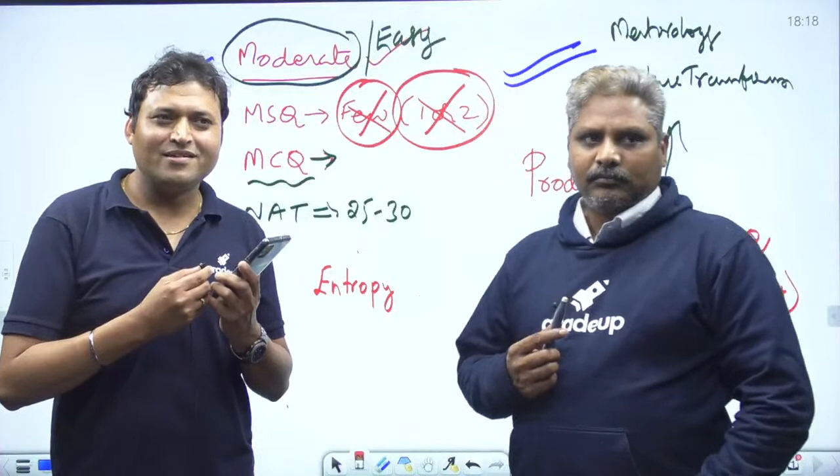Then there was a question based on instantaneous center. They wanted to know which are the instantaneous centers in the given diagram. There was one question based on this.

In rolling, in the metal forming section, there was a question based on width increased and thickness decreased. So they asked us to calculate the new length of the workpiece. So directly it's volume conservation again. In the morning session also there was a question from rolling.

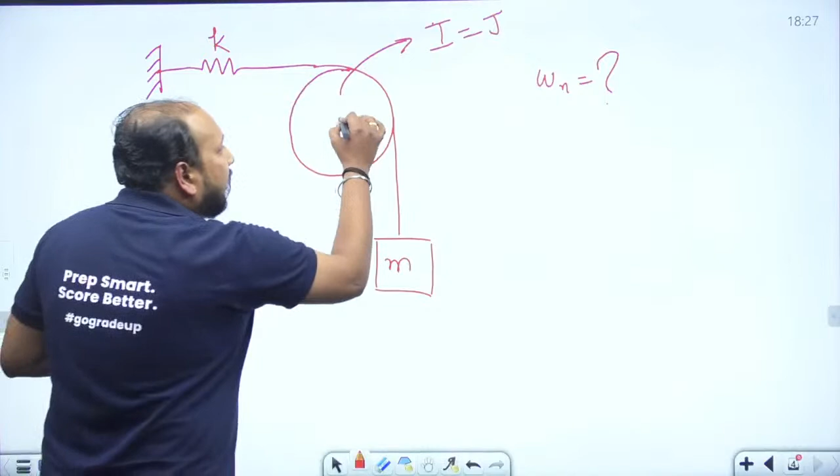In this problem, you have to calculate the natural frequency of vibration in radian per second. Very easy, you can directly apply. Let us suppose we're having a small deflection in theta, so we'll be having inertia force I theta double dot. In this case, mg will be having a restoring force as mg r theta, and in the spring also we'll be having k into r into theta. Is this clear? We are having mg and k r theta. What do we have to do? We have to use direct formulation.

How do we use it? Simple: I theta double dot plus mg r theta, because the deflection which we are getting over here, that is r theta, the same deflection will be in this mass also and in the spring also. So this will be plus k into r theta, this is equal to 0. You have to calculate the torque, and you'll get the direct formulation. So what will be the correct answer?

You'll be having I theta double dot plus mgr plus kr square into theta.

In vibration, we solve these types of questions very frequently. We try to add different springs, we try to remove this rolling part, we are directly connecting. So there are many combinations of questions you can expect from this vibration topic. I want everyone to like this problem, because this question is very, very important.

Okay, so now the question is very easy. You're having theta double dot plus mgr plus kr square into theta, divided by I, equal to 0. You can equate this equation with the formulation theta double dot plus omega n square theta equal to 0. From this, omega n is equal to under root of mgr plus kr square by j, because in the problem they are not giving moment of inertia directly as I, they are saying it in terms of j. So we'll be placing this value and we'll get the natural frequency of vibration for this kind of problem as mgr plus kr square by j.

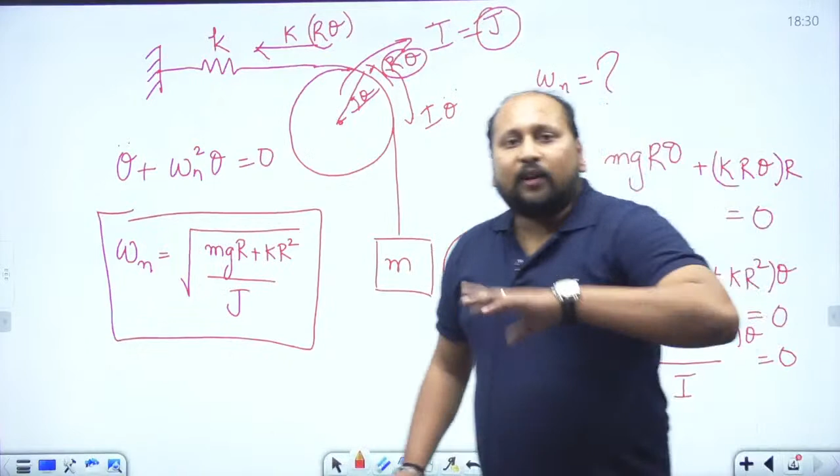Now normally in vibration we do derivation in this type of problem, so it's a purely conceptual problem from a vibration point of view, and definitely it's a 2 marks problem. Very easy, it was an MCQ problem with some options, so the correct answer is mgr plus kr square by j.

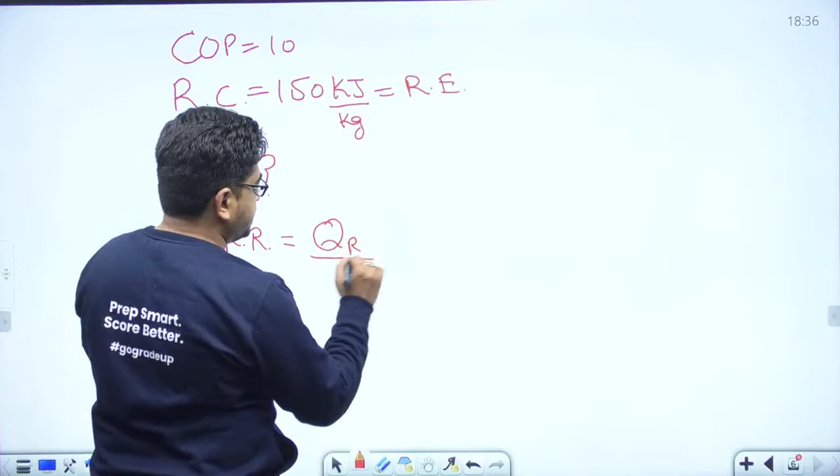Tell me the formula for heat rejection ratio. That formula for heat rejection ratio is heat rejection in the condenser divided by refrigeration effect, or you can also write it as 1 plus 1 upon coefficient of performance. So from here we can write heat rejection divided by refrigeration effect. What is refrigeration effect? Which is 150. So refrigeration effect is 150, 1 plus 1 upon coefficient of performance is 10.

So you have to find the value of heat rejection. How many of you have solved this correctly? Please write. Heat rejection is coming as 165 kilojoule per kg. So this was a very simple question, you can easily do this, right?

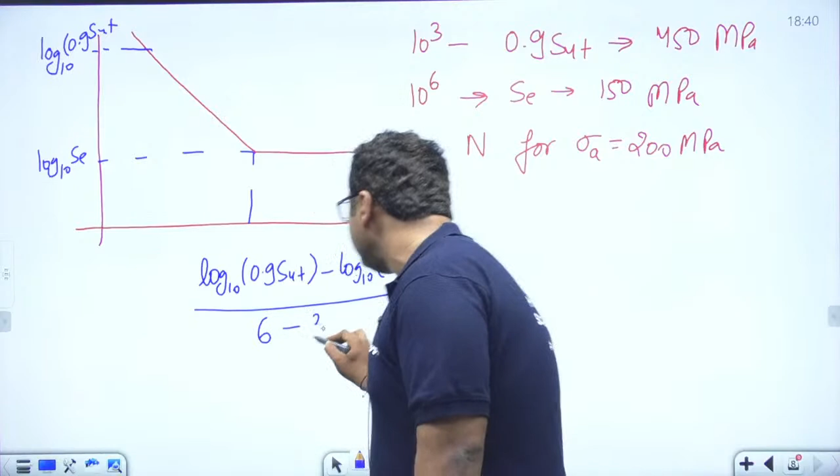So when we have done this type of question in class, I told you we will be having one point like this, log base 10, which is going to be 0.9 times SUT. You have one point here as log base 10 SE. And we will be using the straight line equation: log base 10 0.9 times SUT minus log base 10 SE, divided by 6 minus 3, equals log base 10 of 0.9 times SUT minus log base 10 of sigma amplitude given, divided by 6 minus x.

By doing that, you will get the value of x to be 3.786. Putting this value, you will get the number of revolutions, which is 10 power x, equal to 6111.72 revolutions. So guys, I feel you are getting it.

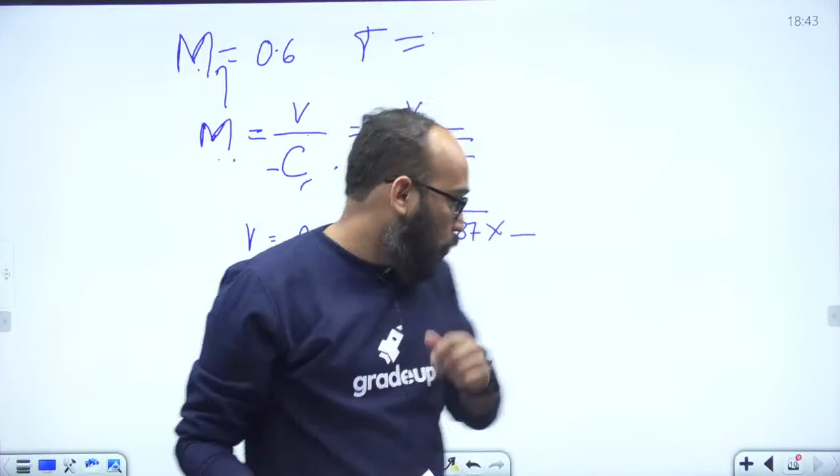Okay, cool guys, one more question. Again a very standard question coming from refrigeration and air conditioning, psychrometry, which is the regular question that comes up. So the values that were given.

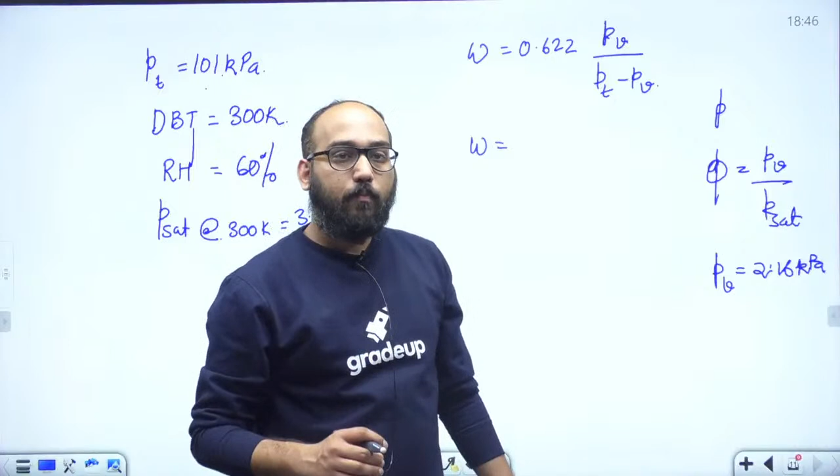Come on, what is the answer? So this is coming as 0.01359 kg per kg of dry air. Okay, please make sure what was the unit. Are you getting it guys?

Okay, so this is again, we'll say that it is memory based. As you're letting us know with the data, we are getting with the solution. Come on guys, please do share. Yes.

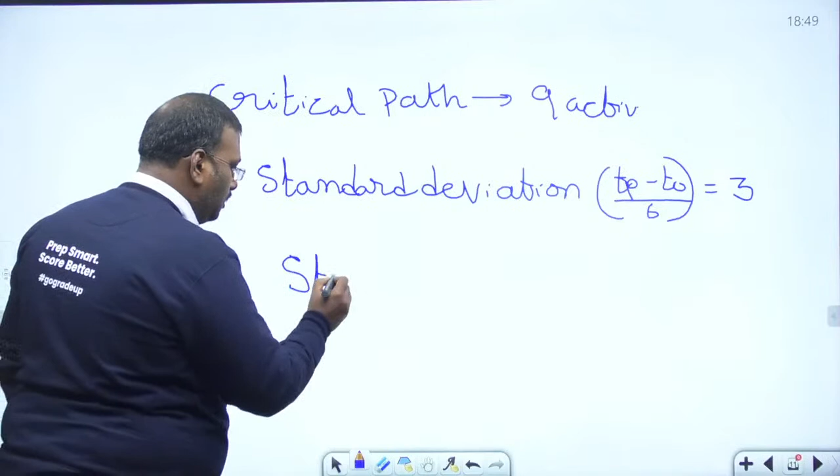So it was given as 3, but they are asking what is the standard deviation of the project? Standard deviation of the project. So we have to find out standard deviation of project. How we have to get this one, sir? Very simple.

That is nothing but sigma is equal to square root of sum of the variances, TP minus TO divided by 6, whole square, my dear friends.

So now how can we get this? They gave that TP minus TO divided by 6 was given as 3. Therefore, TP minus TO by 6 whole square is equal to 9.

Therefore, variance of project, sigma is equal to square root of sigma. Number of activities given is 9, i is equal to 1 to 9, and here it is going to be 9. Therefore it is going to be square root of 81, which is nothing but 9 days, my dear friends.

So the standard deviation of the project is 9 days. Is it clear to all of you?

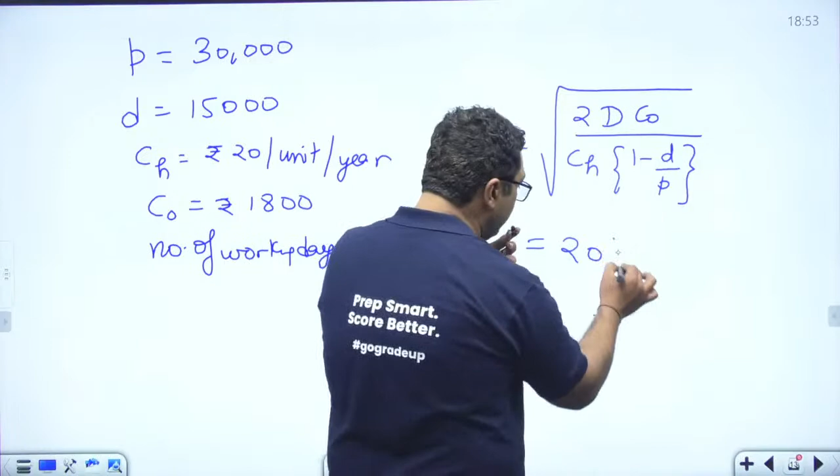It is going to be 2DC0 upon CH, 1 minus D by P. That is what you have to do. You need to apply this formula, and after getting this, you will be getting the answer to be 20,124, yes, 0.6. So these are the answers, this is the answer for this question.

Okay, so yes, now Akash sir is coming for a question. Hello sir, hello guys, how are you? So I hope your gate exam has gone well.

So now I will have one small question for you, that is from production. It's a very simple question and you might have done this kind of question a lot of times. They are asking you basically about which cast iron possesses all carbon in the combined form. Any idea guys? Any guesses? What is the answer for this? The question is this basically.

Cast iron which possesses all carbon in combined form - you can give the answer to this question without even looking at the options. Okay, what will be the answer guys?

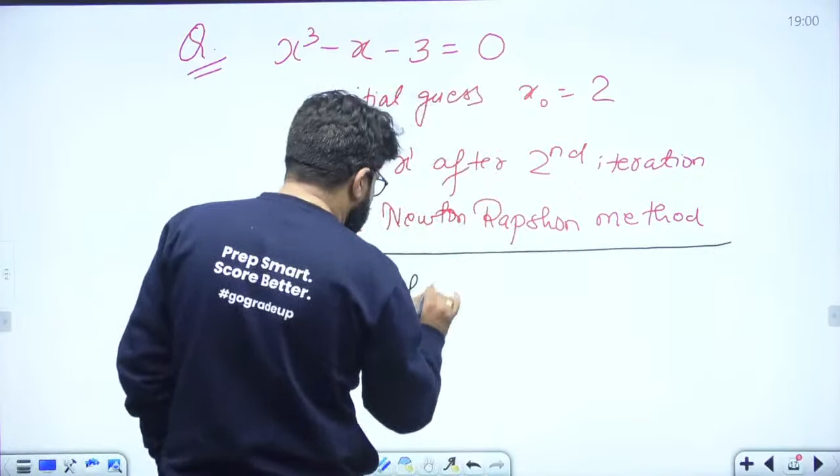There is one question from polar coordinate double integral, that also we are discussing. So what is the answer for this by the Newton-Raphson method? For Newton-Raphson method we need the f(x) and f'(x). f(x) is equal to x cube minus x minus 3, so f'(x) is equal to 3x square minus 1.

Dilip, as of now, the morning mathematics questions I received, around 4-5, were moderate. Evening questions are also moderate, like one differential equation question that is even simpler than the morning one. Mathematics ki baat kare, Newton-Raphson is only calculative. Only thing that you were commenting about, that polar integral question, that is also very simple. Students just worry looking at the polar integral, but there's nothing like rocket science in it. So more or less similar level as the questions we have collected now, but we'll be collecting a few more questions and then we can comment.

Shubhadeep, correct. Kailash, correct answer. Very good. Kailash, you gave the first iteration result first. Alok Mishra, Ritesh - so everyone has done this question, 1.67 approximately. So you know what has to be done. This is f(x) and f'(x), and by the Newton-Raphson iterative formula, I am going to write xn+1 is equal to xn minus f(xn) divided by f'(xn).

Kailash, you already brought the answer for the double integral too. That's correct, I'm going to take that question. So basically guys, suppose you are finding x1, so that will be x naught minus f(x naught) divided by f'(x naught), and then you complete the calculations for x2, which is x1 minus f(x1) divided by f'(x1). Because we require a basic calculator for this calculation, complete the calculation - approximately 1.67.

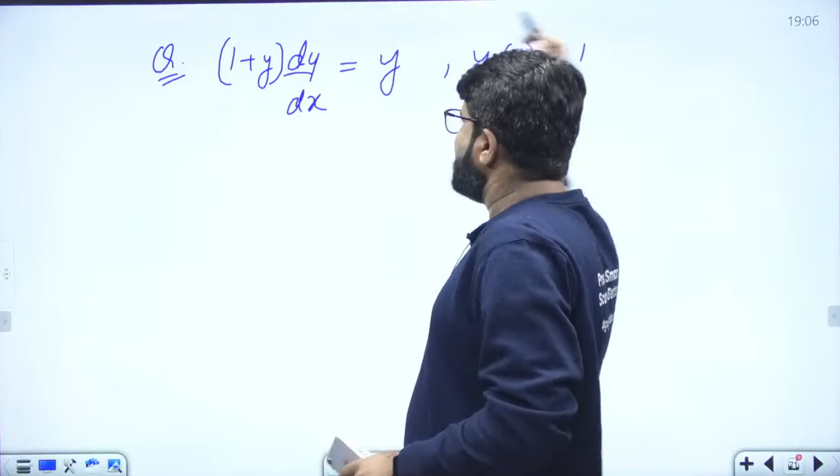This is a differential equation question: 1 plus y dy by dx, easier than the first lot. This differential equation question is easier than the first, given y(1) equal to 1. I just need to solve and write down the expression for y. That is the question I have got.

1 plus y dy by dx equal to y. In the morning the question was based on the linear differential equation of first order. This one is totally variable separable, so let us divide by y. So (1 by y plus 1) dy equal to dx.

That's it. What do we do next? Integrate it. Okay, what is 1 upon y integral? ln y. Integral of 1 dy is y. So ln y plus y is equal to x plus c. Given that y(1) equal to 1: log 1 is 0, plus 1 is equal to x.

X is also given as 1, so 1 plus c. So 1 equal to 1 plus c. C is cancelled out and c is equal to 0.

Using the initial value, solution is also obtained: log y plus y is equal to x. Now the rest depends on how the options were arranged. We have not got the options, but we have got the question. So if the options are rearranged, you will be able to do it smartly. The answer is log y plus y equal to x, that is the solution to this given differential equation.

To this differential equation, maybe the options are given in the form of exponential as you're suggesting. Yes, that is also quite possible, so we can arrange it in that form also. Not a big deal, okay, so I think...

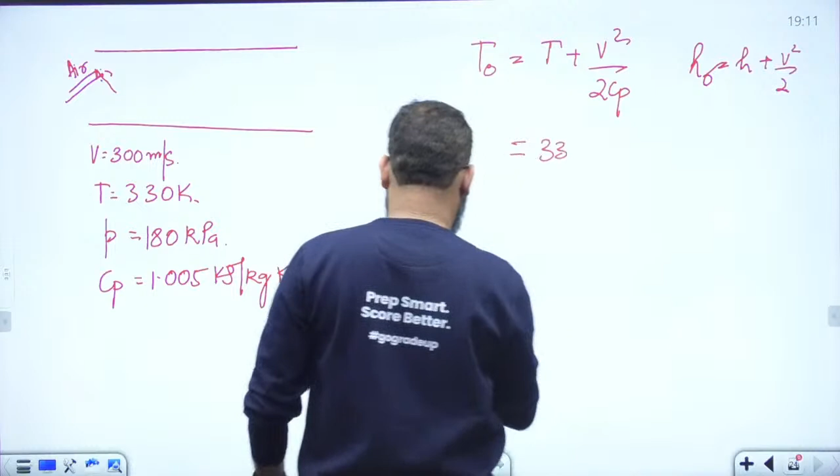Stagnation temperature T0 is given as T plus V square by 2Cp. It actually comes from applying the steady flow energy equation, where we get this as V square by 2. Cool enough? Now if you put the value, this is 330 plus, with 300 square divided by 2.

Now here comes the point guys - these enthalpies we normally put in kilojoule terms. If you are putting it this way, this should be 2000. Or what you could have done was convert Cp back to joules, whichever way you want to do it. So normally we discuss this.

So 2000 into 1.005, you put the value, this is coming as, come on, 374.78 Kelvin. Was this the answer guys? Was this the answer?

So we have got 2 questions from compressible flow. Now we have Rishi sir with another question.

Never mind dear, never mind. Hello my dear friends, come on, cheer up yaar. Share this information with all your friends so that they will be benefited and can analyze how they have performed in this examination, my dear friends. Come on, cheer up. I am here with one more question from Deflection, my dear friends.

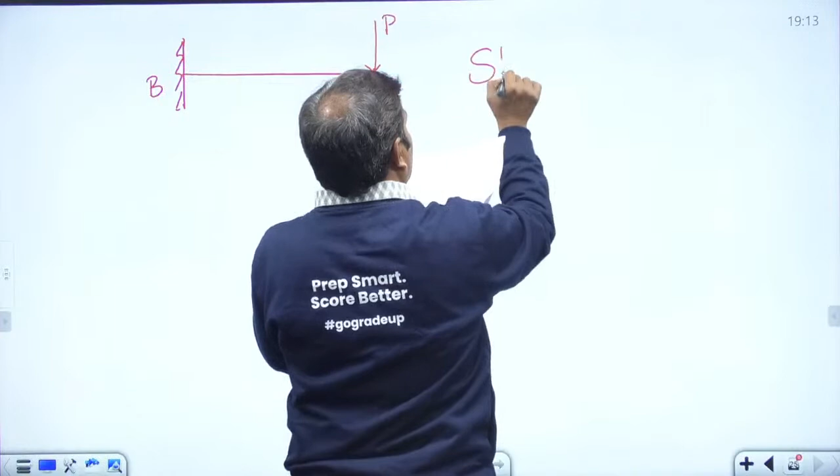So once again, my dear friends, the question is from Deflection, and the slope is being asked, my dear friend. The slope is being asked for a cantilever beam subjected to the end load P, and this point is named as A and this is B, my dear friends. The question is, what is the deflection slope at point A? Can anybody tell what is the answer, my dear friends?

Can anybody tell what is the answer to this question? Kailash, thank you. What is the answer, my dear friends? Come on yaar.

So Piyush, don't worry, GATE is one of the exams, my dear friend. There are so many series of examinations after GATE - it may be ISRO or BARC or steel plants, so many exams are there. Don't worry Piyush, GATE is one of the exams, so you get one more chance of better settlement in life, my dear friend. Don't worry, don't get demotivated. Yes, very good, my dear friends.

Rahman, Harshit, very good, my dear friends. It is 50 microradians - the right answer, my dear friend. Very simple question, you can solve it using the bending moment approach.

Area of the bending moment diagram. If you see the bending moment diagram, it is clearly mentioned in the question that the area of the bending moment diagram is given as 10,000 Newton meter square. And EI value, that is flexural rigidity, is given as 200 into 10 to the power of 6.

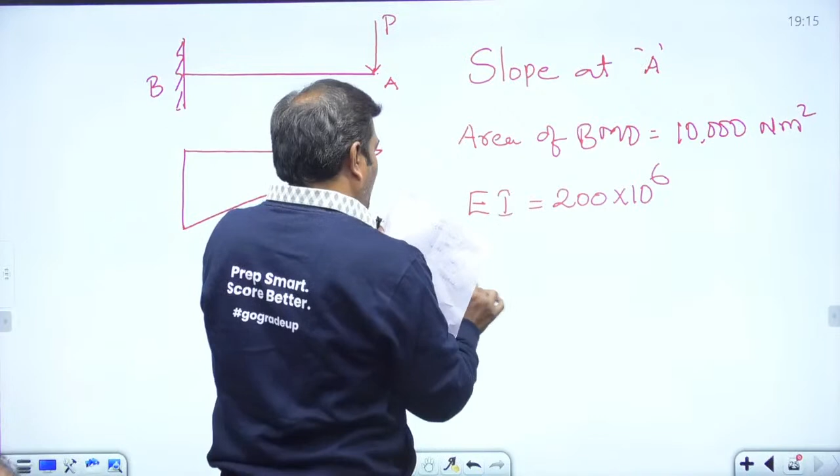We know by the formula that theta A minus the slope at B, the fixed end, where theta B is equal to 0, is equal to the area of the bending moment diagram divided by EI, that is 10,000 divided by 200 into 10 to the power of 6. The answer comes out to be 5 into 10 to the power of minus 5 radians, which is 50 micro radians, as asked in the question.

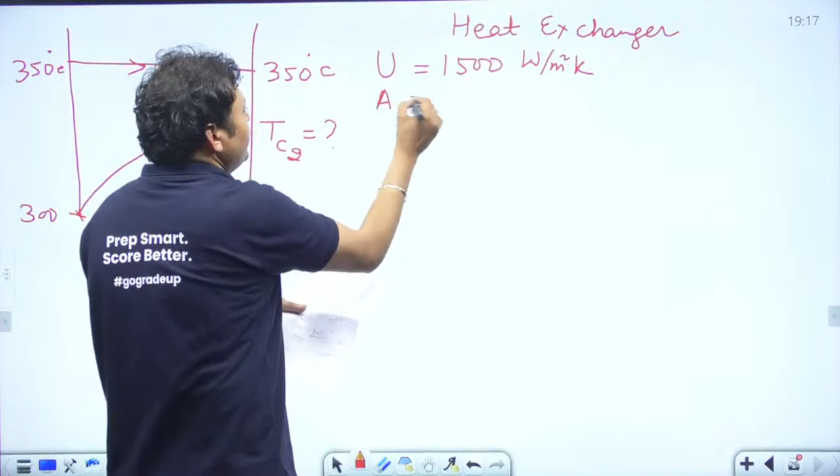So how to solve it? The other information given was the overall heat transfer coefficient as 1500 watt per meter square Kelvin, and area of heat exchanger as 400 meter square. The unit is meter square. The mass flow rate of the cold fluid was given as 100 kg per second, and specific heat is given as 4000 joule per kg Kelvin. So how to solve it?

By the energy conservation equation, Q can be written as the heat transfer rate, which is the heat gained by the cold fluid, that is mass flow rate of cold fluid into specific heat of cold fluid, into temperature difference for the cold fluid, so it is TC2 minus 300 degrees Celsius.

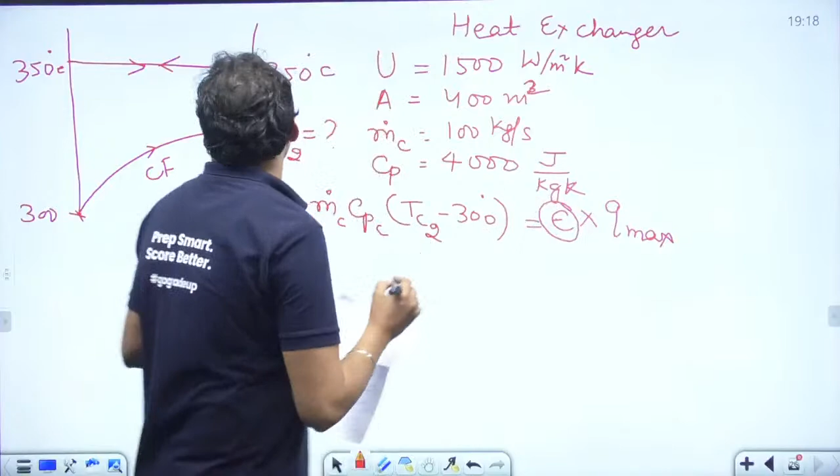That will be equal to effectiveness of the heat exchanger into Q maximum. How to find the effectiveness? Because there is a phase change, effectiveness is given by 1 minus e to the power minus n, where n is the NTU. How to find the NTU? NTU is equal to UA upon C minimum. What is C here in the denominator? C is always the heat capacity, the product of mass flow rate and specific heat, so UA by mass flow rate of cold fluid into specific heat of cold fluid.

What is the NTU? If you put in the values, everything is given, so UA by C minimum for the cold fluid. If you put the values, NTU comes out to be 1.5. And if you put the value of NTU into the effectiveness formula, effectiveness comes out to be 1 minus e to the power minus 1.5. What is the effectiveness of the heat exchanger? I have solved it for you, it will be around 0.7768.

Effectiveness will come out to be 0.7768. Now what is Q maximum? You don't have to solve everything. First develop the expression, and if the terms are getting cancelled out, then you can do that. M dot C into CC into TC2 minus 300 into...

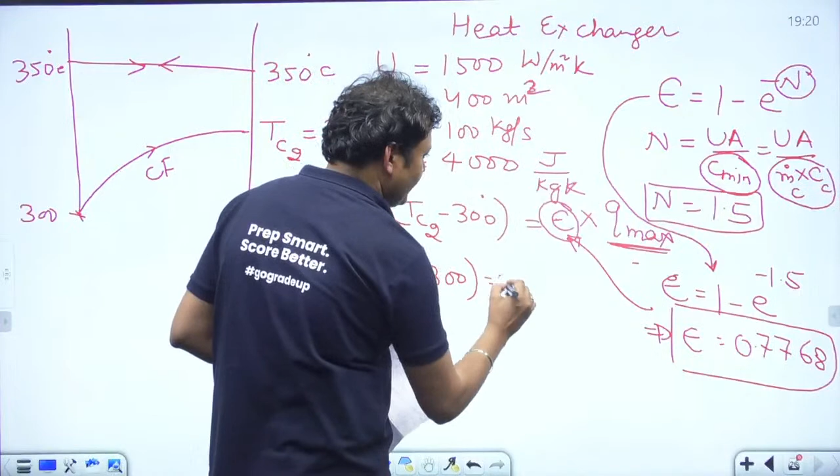Effectiveness is 0.7768 multiplied by Q maximum. If I remove this effectiveness, we have already used the effectiveness value, so Q maximum will be equal to C minimum. Effectiveness is also equal to Q upon Q maximum. So Q maximum into effectiveness, and Q maximum will be equal to C minimum, that is M dot C into CC into TH1 minus TC1.

This is TH1 and this is TC1. If you subtract these two, then it will be 50. So the mass flow rate is getting cancelled out, and specific heat is getting cancelled out with this specific heat. So what is the value of TC2? Can you let me know? 300 plus 0.7768 into 50.

What is the answer? Please share your answer. So that was the question. The question was a little lengthy, but yes, it was not that difficult. The final answer will be around 338.84 degrees Celsius. That should be the answer.

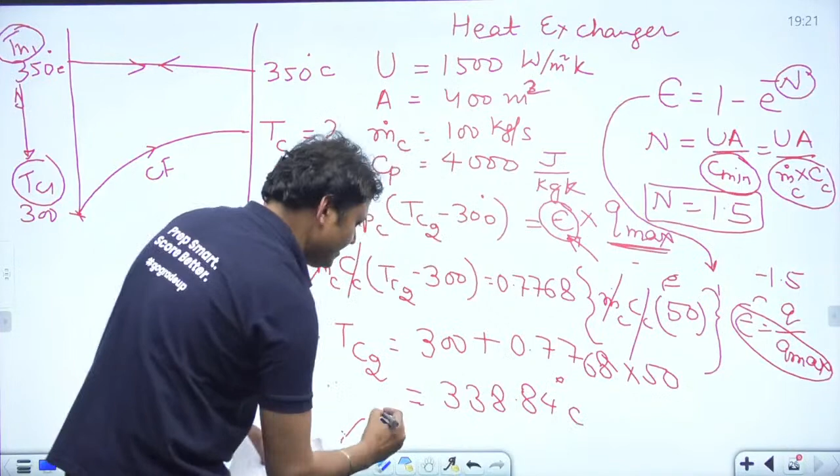Are you guys getting the answer? So how many of you have done it correctly? Please keep on sharing your information, keep on telling us whether you have got the correct answer or not.

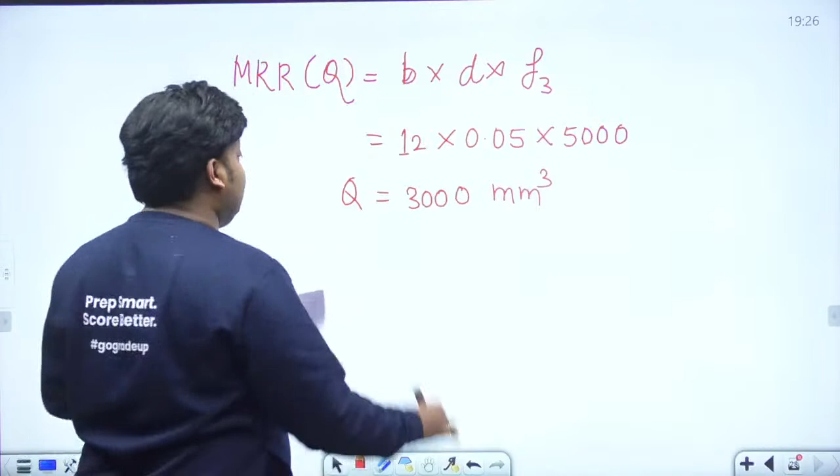This will be the MRR you are getting in a single pass, but they are saying the number of passes is 20. So I can write the total MRR will be 20 multiplied by 3000, which will be around 60,000 mm cube per minute, right?

So definitely to calculate the MRR, it is given as the width of the grinding wheel multiplied by depth of cut multiplied by table speed. This is the MRR.

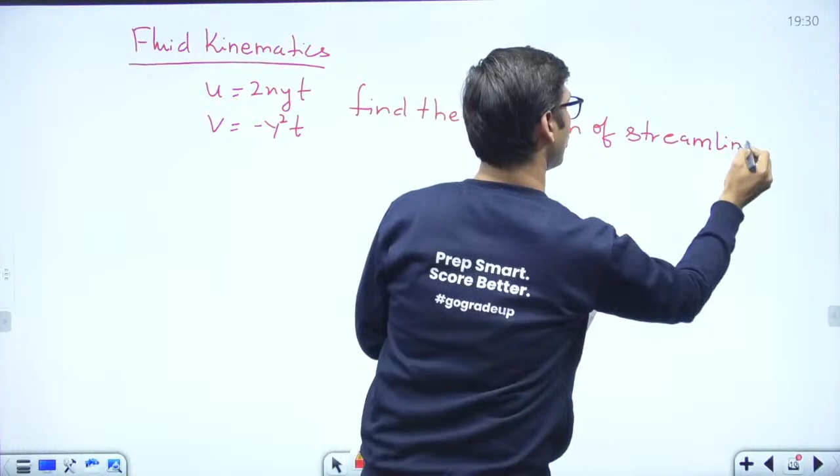This question came from fluid kinematics. In that question, it was given that the x velocity, u, was 2xyt, and the v component of velocity was minus y square into t. You have to find the equation of the streamline at point 1, 1.

This was a question from fluid mechanics, fluid kinematics topic. As you have to find the equation of the streamline for two-dimensional flow, since they have given the x and y components of velocity, you know the equation of streamline in 2D is dx over u equal to dy over v.

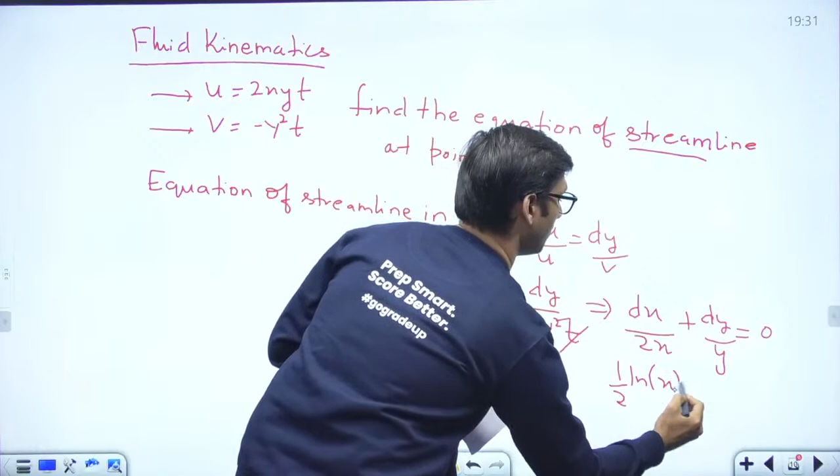If you put the values, you get dx over 2xyt equal to dy over minus y square into t. The t and y cancel out, leaving dx over 2x equal to plus dy over y, equal to 0. Integrating this, you get half of log x plus log y equal to constant, which can be written as log of x into y square equal to c. Since they have given the point x, y as 1, 1, substituting gives c equal to 1, so the equation becomes xy square equal to 1.

I hope this was the answer for this question. Yes, my dear students, have you got this answer? xy square is equal to 1 — this will be the solution for this question.

Let's see another question, also from fluid mechanics. For two-dimensional incompressible flow, the equation was given that you have to find the value of del by del x of u square plus del by del y of uv.

The options given were: option A, u du by dx plus v du by dy; option B, u dv by dx plus v dv by dy; option C, u du by dy plus v dv by dx; and option D, u du by dy plus v dv by dy.

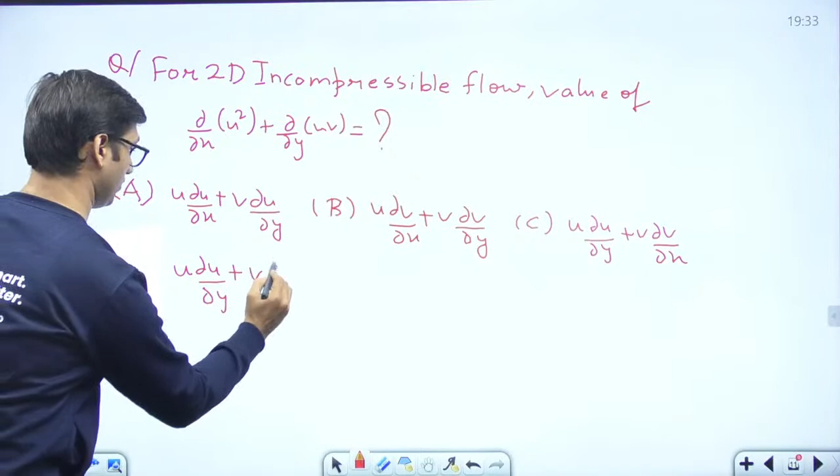So how can you solve this question? One important thing mentioned is that it is an incompressible flow. That is an important catch here. All right, let's see how to solve this question.

Now the equation given was del by del x of u square plus del by del y of uv equal to 0. To solve this, you have to use some mathematics or differential form. If you open this, you will get 2u du by dx plus u times dv by dy plus v times du by dy.

You can also write this equation as u du by dx plus u du by dx plus u dv by dy plus v du by dy. If you take u common here, you get u times (du by dx plus dv by dy) plus v times du by dy.

Now, for incompressible flow, the continuity equation has to be satisfied. The continuity equation is du by dx plus del v by del y should be equal to 0.

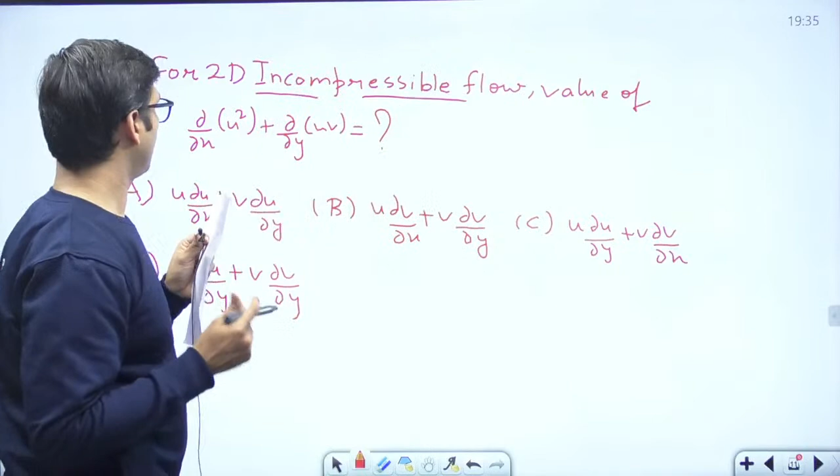From here, where do we get the PDF of the solution, sir? Yes. This question is wrong, sir. Actually we have got this question based on memory, and this option has been shared. Which question are you saying is wrong? They gave it to you in the options. Okay, so maybe the question we have got, as I told you, is memory based, and some student shared this question. So definitely if the question is something else, we will get some other answer. As I told you, these are all memory based questions.

So the last question I would like to share is from compressible flow. In this, they gave that there was a duct, and in that duct some air was flowing. The velocity given was 300 meters per second, and temperature was 330 Kelvin. Please tell me if it is correct or not.

Okay, has this question been done already? Please tell me, has the solution already been given? Yes, this question was from compressible flow. You have to find the stagnation temperature, which can be calculated using the formula: stagnation temperature equals static temperature plus V square by 2Cp. Have you already got the solution for this question?

So I will give the solution for this question. The velocity was 330 meters per second — sorry, one second, velocity was 300. Okay, already got it, alright. So if you already got the solution, then it's fine.

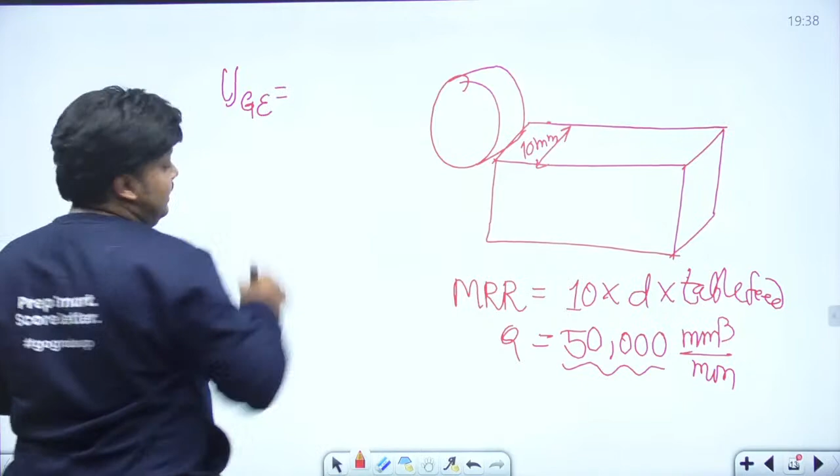And finally, if you put here this 50,000 instead of the 60,000, because we have taken the 12 mm - of course 10 mm is there. So whatever the MRR we are having available on the plate only, right? So definitely this grinding, specific grinding energy will be getting this divided by this 50,000, and that will be 192, right?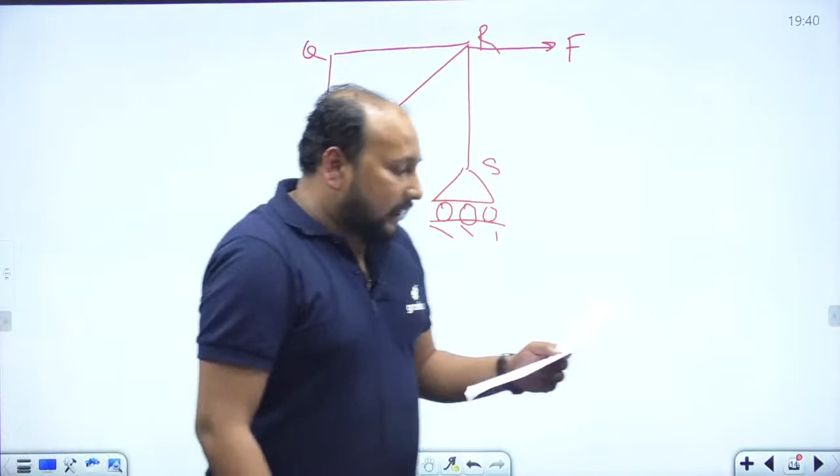From your engineering mechanics. The question was something like this: we are having a truss, we are having a hinge joint, and we are having a roller joint. This is point P, this is Q, this is R, and this is S. At point R we are having F. They are asking what is the force in the member RS. I hope everyone has solved this.

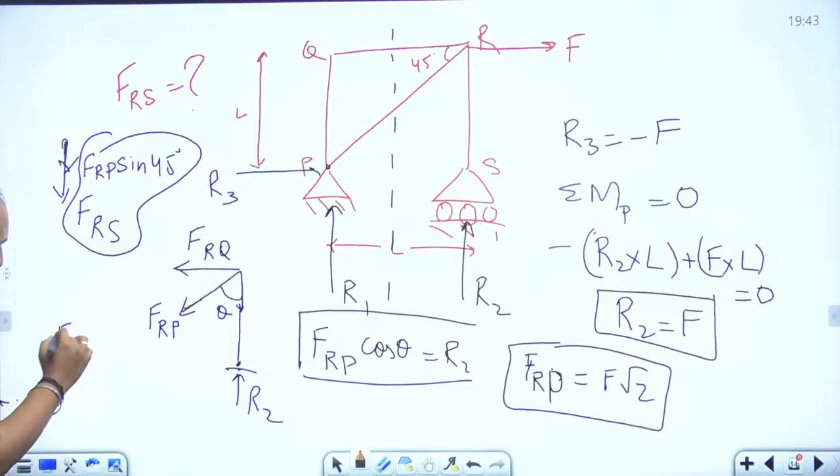What is the value of FRS? You will be getting directly F - take just joint R, so we'll be having a force RS and a force one more in the downward direction, that is FRP sine 45, and that is equal to 0. Just add these two values, you'll be getting ultimately FRS is equal to minus F. So your answer will be minus F.

Exactly, you can go with the beauty of mechanics - you can solve a single question by two methods, you can go with method of section, you can go with method of joint. Now there is one more problem from the theory of machines, and that is a very interesting problem - that is flywheel. The very interesting problem, that is flywheel.

In the question they are given the torque value is equal to 12,000 plus 2500 sine theta, sine 2 theta. Okay, this question was given. Along with this we are having RPM equal to 200 RPM and coefficient of fluctuation of speed equal to 0.5%.

I hope this question has been solved. The problem is they are asking the value of moment of inertia. It's a 2 marks problem, and its calculation is somewhat lengthy, but if you know the concept you can quickly solve it in a fraction of seconds.

Now what you have to calculate is the work done. Work is equal to T d theta. Now tell me what will be the cycle time. If you see this equation, respond in the comments what the cycle time will be. If you are having sine 2 theta, then definitely your cycle time will be equal to pi, because it's 2 theta.

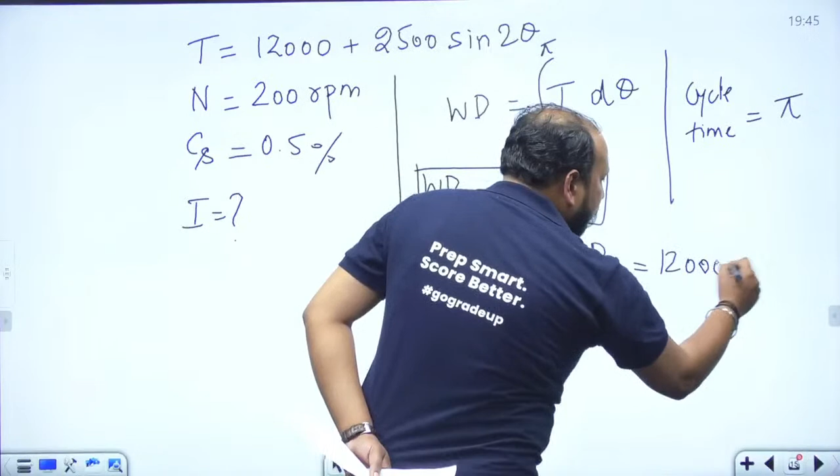Now what is work done? That is equal to T mean into cycle time. So your T mean is equal to work done by cycle time, and ultimately you'll be getting 12,000 Newton meter as your T mean. Now the question is you have to calculate the points where T mean and T are equal. So next step you go with T mean equal to T.

When you make it equal, ultimately 12,000 gets cancelled out. Let me write it for you: 12,000 is equal to 12,000 plus 2500 sine 2 theta. So ultimately you are getting sine 2 theta is equal to 0. So theta comes out to be 0 and pi by 2.

So next step is you need to calculate the maximum fluctuation, that is integral from 0 to pi by 2 of T minus T mean into d theta. Is it given plus minus? If it's given plus minus, then it will be equal to 1%. Accordingly you can get the answer.

So when you calculate this, delta E is equal to integral from 0 to pi by 2 of T minus T mean into d theta. So this will be 2500 sine 2 theta, integrated from 0 to pi by 2 d theta. Ultimately you will be getting this value to be 2500.

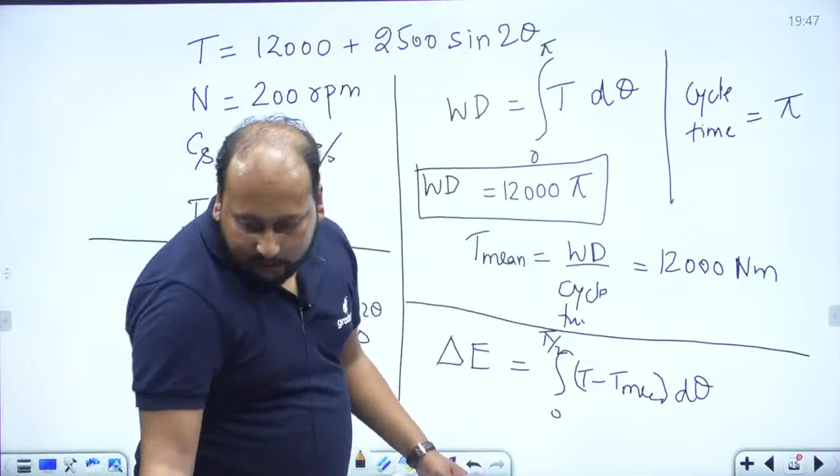You need to solve it and you'll get the exact value. Actually, the data I got is for 0.5%, so I was getting approximately, let me check the value... yeah, I was getting 1140. So definitely it will be half of that.

So your final answer will be 1140 by 2, that is 570 kg meter square. Exactly, very good. So approximately you'll be getting 570 kg meter square. That is the correct answer for this.

And every year, if you see from Theory of Machines, you are expecting one question from Flywheel, and this is it. Definitely if you compare the morning session and evening session for Theory of Machines, I can say that in the evening section the Theory of Machines was somewhat difficult compared to the morning session. So let's hope we'll soon be coming with new questions.

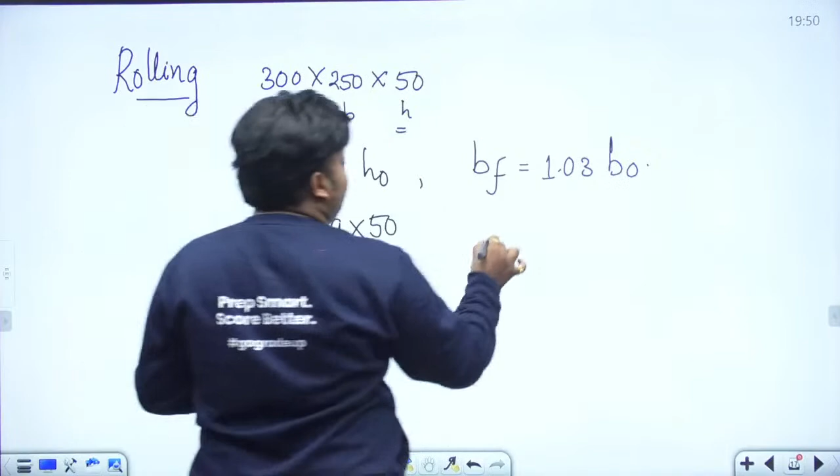And the final width, we are assuming it's a plane strain condition operation, so width is not supposed to change, but here spreading is given, 3% spreading for the width, so it is 1.03 times original width, that is 250. So after spreading it will be 257.5 mm.

And original length is how much? 300, I will write here, it is 300 mm. So tell me what is the final length. So of course, dear students, in any metal forming process the very first basic assumption that is valid is the volume constancy, right?

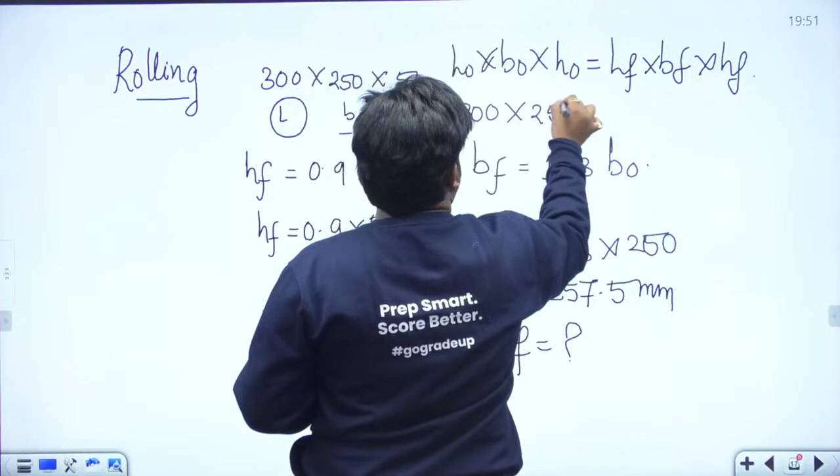So if I write, L original into B original into H original should be equal to L final into B final into H final. So tell me what is the answer. It is 300 multiplied by 250 multiplied by 50 is equal to H final 45 multiplied by 257.5 multiplied by this final length. Tell me the value.

So what is LF? I hope you are getting it is 3000, no? So it is 3000, dear students, it is 3000, right? So L final, tell me what is the answer you have got? Okay, 3000, right Utkarsh? Yes, 3000 millimeter is there. So yes, volume constancy is valid. Okay, length is 300, no issue, that is correct, absolutely correct.

So if you calculate, it will be 3236.24 mm. So simple volume constancy, nothing else.

Interpolator, dear Utkarsh, the function of the interpolator in the CNC is just controlling the movement of the machine axis. Okay, so it controls the feed rate of the axis, right? Very nice, very nice, that is absolutely correct. Very nice, very nice. So Rakesh sir is with me. Rakesh sir, oh dear, thank you sir.

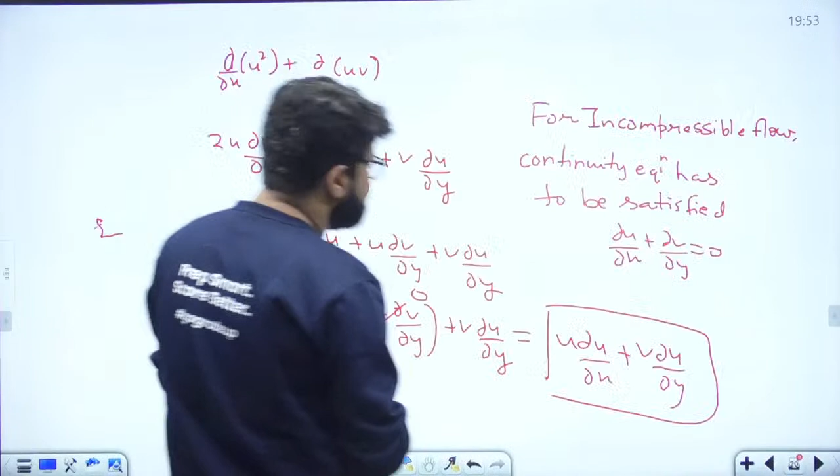Hello guys, so a few aptitude questions. I already discussed 4 maths questions. I have 4 more maths questions, but before that let's start discussing aptitude as well, because aptitude has not been discussed as of now. Okay, just one second guys. Yes, so some aptitude questions we need to discuss.

Okay, come on. So one of the aptitude questions coming up is from the very simple direction sense. It's not a complicated direction sense question, it is a very simple direction sense question.

Yes, aptitude again very easy as in all the papers. So one of the aptitude questions: X moves. GATE has asked good questions from direction sense earlier, but this is a very simple question of direction sense. X moves 50 meters towards west, and then it turns 50 meters right.

Then he turns 50 meters right. What is his position with respect to the initial point? Yes guys, quickly comment the answer. Only they're asking the direction, and yes Utkarsh, it is easy only.

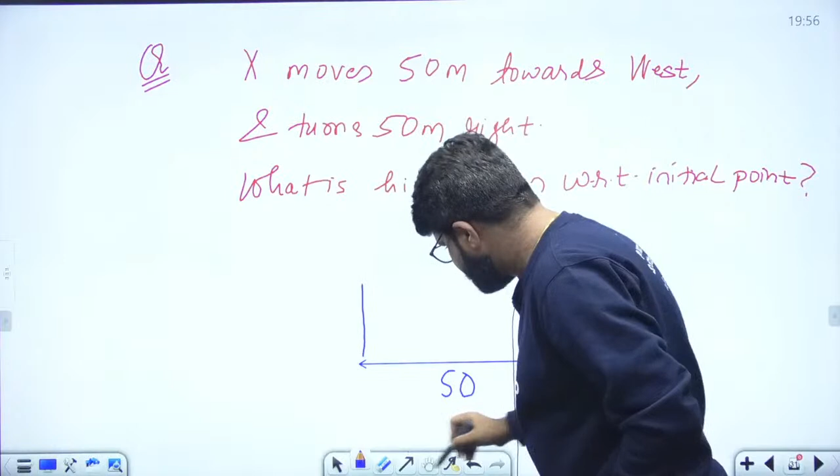This is 50, and then after moving west, I am turning right. So this is a combined direction - one is west and one is right combination. So I will be moving towards right, I take a right here. So west to right, this makes the direction. What is the final answer? The final direction you are able to see here is from the initial towards the final point - this is the west. Right means I have moved north.

It is actually northwest. Suppose they have asked for the distance - right be 50 meter gaya, so it is 50 root 2. Under root of 50 square plus 50 square, it will be 50 root 2 if they ask the distance. Yes Utkarsh, equilateral triangle answer was 1/4, very good, very good. I'll come to that question.

All right, so this is northwest. Simple answer - what is his position with respect to the initial point? This was the initial point, so initial point, this is north, and this is north, and this is west. So 45-degree northwest. Next one, what is the next question I have?

Okay, all right, so clocks question. This is basically not a clocks question, it's a logical aptitude question based on LCM - they have only used the word clocks. Otherwise if it comes from clocks concept, it's a slightly better question. So there are two clocks that start exactly - only the word clock is used, but this is not on the clock concept.

Exactly at 10 a.m., one rings for every 30 seconds, and the other one rings every 32 seconds. What is the closest time they both ring simultaneously?

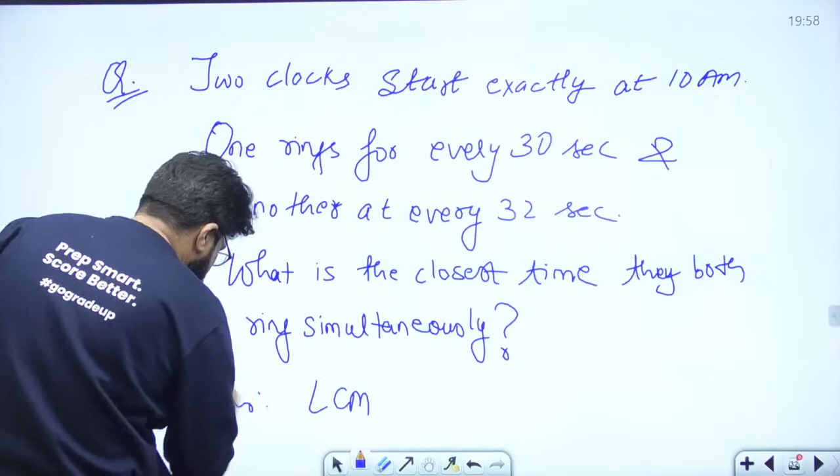So when they are going to collide, it's basically LCM of 30, 32. The LCM of 30 and 32 - you know how to find LCM - it's going to be 480. So the answer is going to be 480 seconds. Now they are asking the time, so 480 divided by 60, if you do this, it's 8 minutes.

If you divide by 60, it's 8 minutes. So what is the answer? 10 hours 8 minutes - 10:08 a.m. That is the answer for this.

All right, third one quickly, as expected - seating arrangement question. Here it is. As expected, seating arrangements being important in the GATE examination. P, Q, R, S, T are to sit facing the same direction. Now there are some conditions always given in the seating arrangement.

P and T - since this is linear seating, not circular - can't sit at the ends. Q is always second from left. The third condition is P can't sit next to S. Find the total possible arrangements.

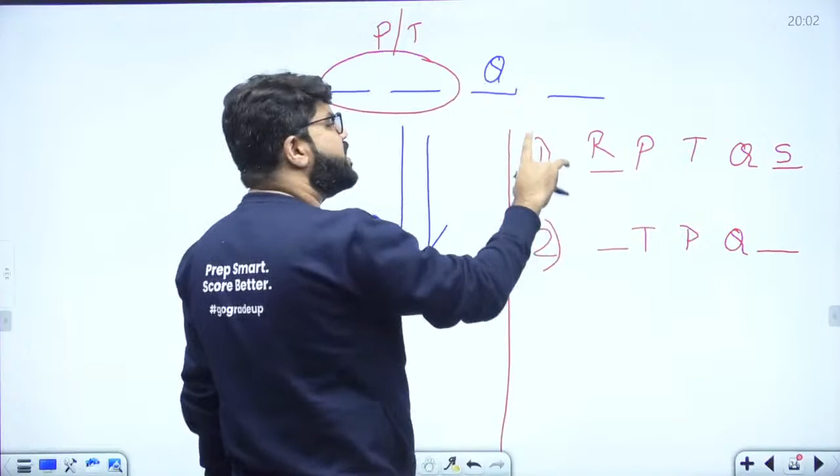Now once again I have reversed the T-P position, so TP is coming up here. Now P can't sit next to S, so S can come here as well, or S can come to the first position as well - anyway, S is not next to P. So these are again two possibilities, R comes here, R comes here.

That's it, so mostly you are giving 3. Some of you are giving the answer as 4. Please recheck, there is no fourth possibility. It's the 3 possibility - 3 arrangements coming up here.

Next one again is expected geometry. I was telling loudly that geometry gate 2016 se bahut zyada focus ho raha hai (geometry is being focused on a lot more since GATE 2016). So what is that geometry question? I will sketch out that geometry question for you. That question is based on simple Pythagoras theorem only, nothing new.

There's a bigger circle given, and inside the circle I am going to inscribe an equilateral triangle. An equilateral triangle is inscribed within this, and within the equilateral triangle another circle has been inscribed, something like this. The point is, no other data is given.

The question is, find the ratio of area of inner circle divided by the area of outer circle. Any answers for this? Sai Prashant not correct. Hitesh Kumar and Cricket Love have the correct answer - 1/4 seems to be the correct answer.

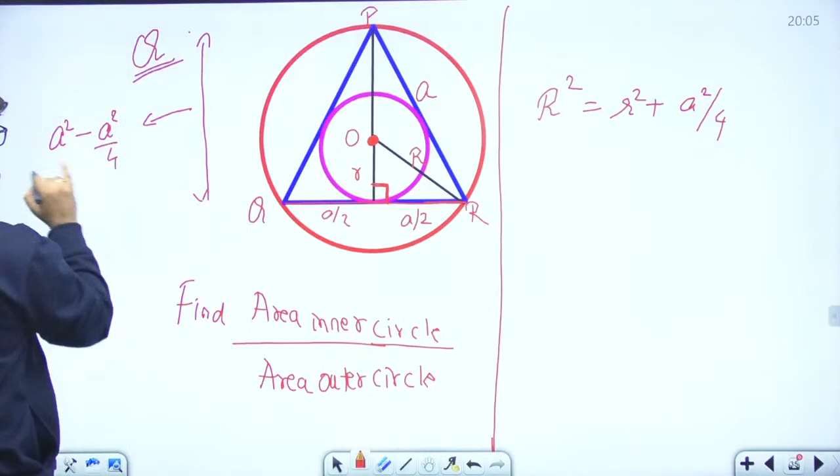If I take the side of the equilateral triangle as A, this becomes A by 2, and I have the clear relation that R square should be equal to small r square plus A square by 4 (A by 2 whole square). Also, what is the altitude of the equilateral triangle? Using Pythagoras theorem again, this is A square minus A square by 4, and the square root of this will become the altitude. Calculating this, it comes out to root 3 by 2 A.

Okay, so if the total altitude is root 3 by 2A, I have one more relation, that is small r plus capital R is equal to root 3 by 2A. Substitute it, whichever one you want. Suppose I substitute R, so R is root 3 by 2A minus small r, whole square is R square plus A square by 4. Any one of your choice you can substitute.

Opening the bracket, 3 by 4 A square plus R square minus 2A also, so minus root 3 AR, is again R square plus A square by 4. Cancelling the terms, R square cancels. I am getting A square by 2, and 3 by 4 minus 1 by 4 is root 3 AR.

So A cannot be 0, everyone knows A cannot be 0. If A is 0, there is no equilateral triangle, so I can cancel A because it is a non-zero quantity, and I get small r. The small r is obtained as A divided by 2 root 3. But we also know small r plus capital R is equal to root 3 by 2

root 3 by 2 A. So small r is A divided by 2 root 3, plus capital R is root 3 by 2A. So almost the question is solved. Root 3 by 2A minus A divided by 2 root 3. This equals, if I take A by 2 common, root 3 into root 3 is 3 minus 1 divided by root 3. So A by 2 and 2 cancel, that is root 3.

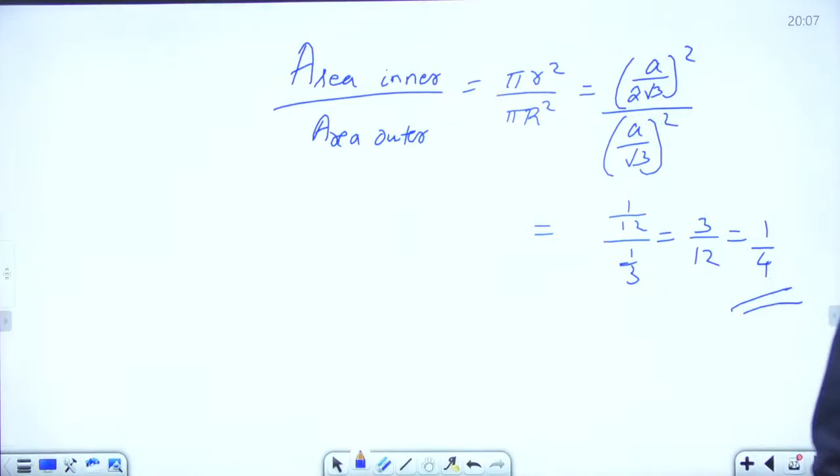Just complete the calculations, and this turns out to be, A again cancelled, 1 by 12 divided by 1 by 3. That is 3 by 12, or 1 by 4. Correct answer, the ratio is 1 by 4. Right? Yeah, definitely you can use the centroid because this is an equilateral triangle, the centroid, median and all will coincide.

But the point is, many students don't remember these results - the centroid, median, orthocenter and circumcenter. It is hard for students to remember that much. So Pythagoras theorem is there, right? Pythagoras theorem means Pythagoras theorem, I think every engineer will remember. You don't have to go into any detail, so if Pythagoras theorem is there, there's no need to think much.

No, in aptitude never study in a way that you carry the burden of formulas. Aptitude is like, even if you have not studied, this gate 21 proves that even if you have not studied and you have done basic engineering, all aptitude questions are solvable. All aptitude questions except verbal. Verbal depends on your English from high school, how well you are aware of English. But all aptitude reasoning based questions, even if you haven't studied, they still get solved.

Okay, sometimes it is difficult also, like this year especially it has been very easy. So try to solve aptitude in that manner, that you don't have to remember any formulas. You should be logical in the approach.

Neeraj sir? Emin sir? Before... yes sir, so Emin sir wants to speak. Guys, come on now, increase the likes, yaar. Okay, I will be coming back with some more maths questions after a little time. Sorry to disturb you guys.

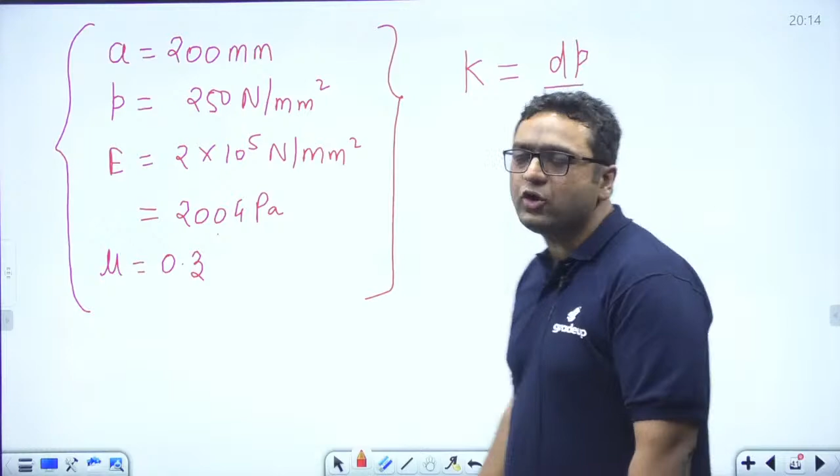So if you are going to find out that, you know that whenever we are using this kind of things, we need to find out the bulk modulus, because bulk modulus is given as dP divided by the volumetric strain. When you find the change of volume, only then you can find out the new volume, and then only you can find out the new side. So for that you need to first find out the bulk modulus.

You know E is equals to 3K into 1 minus 2 mu. When you use this relation, you will be getting the bulk modulus to be equals to 166.67 GPa.

And when you get this, you know the value of K. dP is given to you as 250, so you can write it as 250 MPa. And it can also be written as 166.67 into 10 power 3 MPa. By putting this value, you can find out the volumetric strain.

When you find out the volumetric strain from this, it will come out to be 1.5 into 10 power minus 3, and it is given as dV by V.

From here, volume is going to be A cube, so volume is going to be A cube, and you can find it from 200 cube. Volume is now known to you, so after knowing the volume, putting the volume here, you will find out the value of change of volume. And you know that as pressure is applied, volume is going to be reduced, so the new volume, final volume, will be initial volume minus the change of volume.

After putting this, you will get the new dimension as A dash cube. When you find A dash, that will be the new dimension, and the originally given dimension is 200, so you need to find the change. When you find A minus A dash, you will get the answer as 0.1. The change is going to be 0.1. So this is what you get from this question, which is from strength of materials.

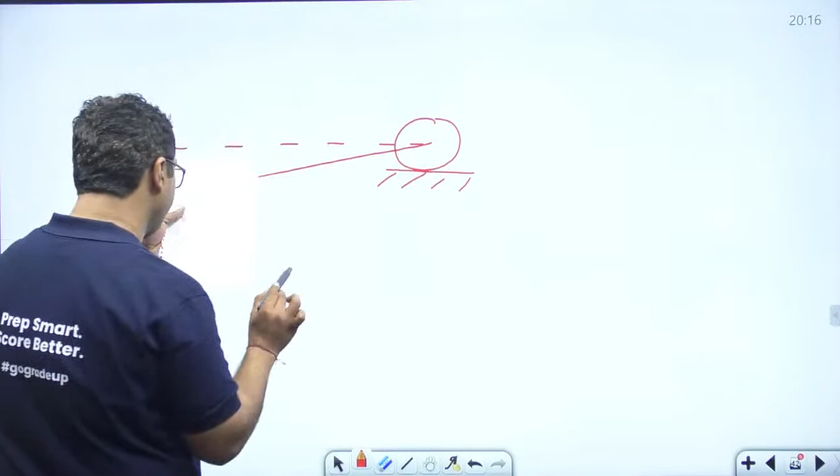So this is a mechanism given like this, and in that a figure whatever I have made. One more thing I would like to add here - it is given when you are going to have this, they are joining here. Okay, so slight change, let me make the figure again. There is a figure like this, and when you're going to have, this is going to be like this.

This is the figure given, guys, and they have mentioned some names here. This is P, this is Q, and this is R, and this is given the name S, this is T, and this is U. And they have asked which of the following are the I-centres.

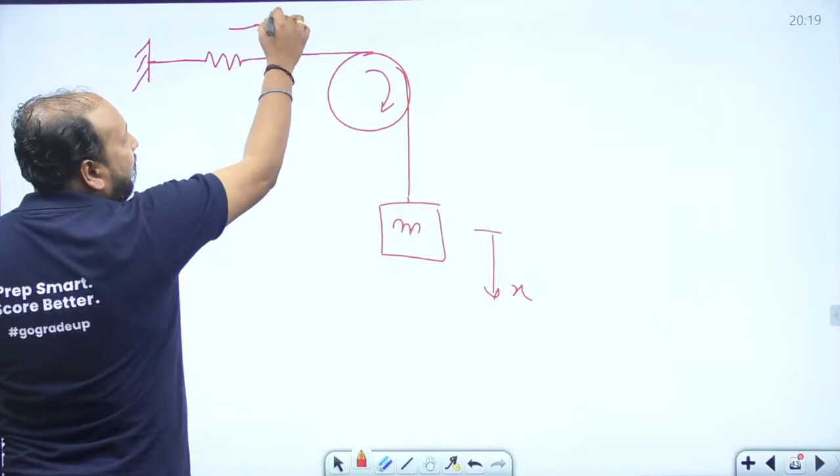Okay, so there is one change. Like earlier we have solved this problem, so there is an update to this problem only. Let me quickly tell you the solution. It's a very easy question. We're having a mass, okay, and it is rotating, and let us suppose this has a deflection x. So here also we'll be having deflection x. If this is x and this is radius r, we can say x is equal to r theta.

If I say this is your small change in theta, we'll be having r theta as the deflection in this. So we can calculate this by using a very easy method: take the total energy, calculate kinetic energy, potential energy, differentiate that, and make it equal to 0. That will be the correct answer.

So what are the two kinetic energies we have? The first kinetic energy is due to rotation, that is half I theta dot square, where theta dot is the angular velocity. Plus the second kinetic energy, half mv square. Let us suppose this is moving with some velocity v, so I can say half m x dot square. This is the total kinetic energy of the entire system.

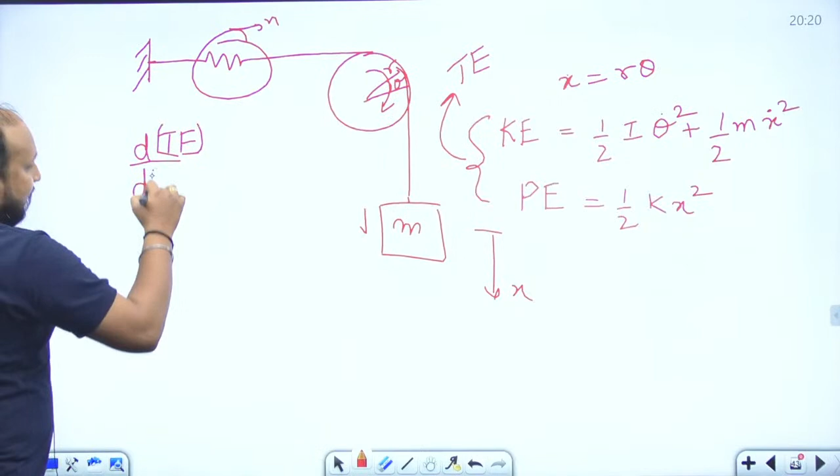Next is potential energy. We're having only one potential energy, due to the spring, that is half kx square. So you can calculate total energy as the summation of these two. Total energy is always constant, so we can differentiate the total energy with respect to time equal to 0, because I can convert this x in terms of theta.

So I can go for x dot as r theta dot, and substitute x square as r theta square. When you differentiate it, you get an easier format: half, and I is given as the moment of inertia in this problem, given directly as j. So half into (j plus mr square) into 2 theta dot, plus half k r square into 2 theta into theta dot, equal to 0.

Just solve it, and you get theta double dot plus (k r square divided by j plus m r square) into theta equal to 0, and this is your omega n square. So ultimately the final answer is omega n equals the square root of this. Just compare this equation with our standard equation, omega n square theta equal to 0. So from this we get k r square divided by (j plus m r square). I hope you got the solution to this vibration problem.

Now Harshish sir will be coming and he'll be discussing the next problems.

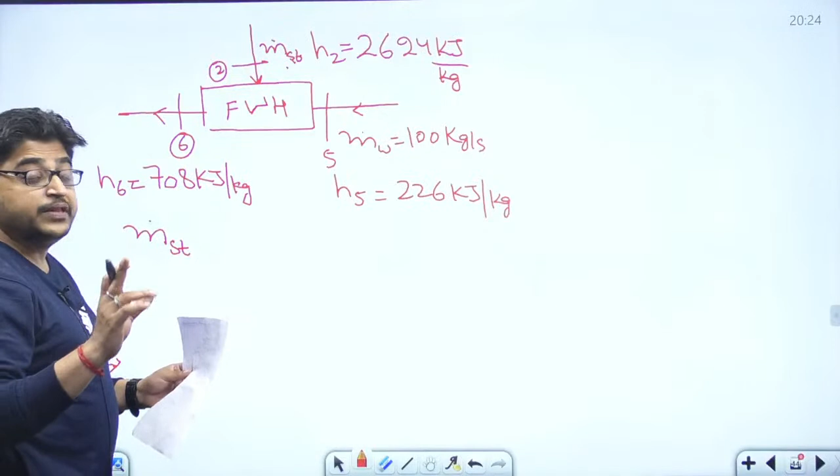This is a very simple question. We have already done this kind of question in class, and I have told you several times that in regeneration they will not ask you to solve the complete question. They will give you the feed water part. So what you have to take here: mass conservation as well as energy conservation. First of all, we are going to take mass conservation.

That is, total mass is equal to mass flow rate of steam plus mass flow rate of water. So what is total mass? Mass flow rate of steam you have to find, and mass flow rate of water is given as 100. Second is energy conservation.

Total energy inlet is equal to total energy outlet. What is the energy inlet? Steam is coming from this side into the feed water heater, this is the energy inlet. Water is coming from this side, this is the inlet energy. And after that, at point number 6, that is the outlet energy.

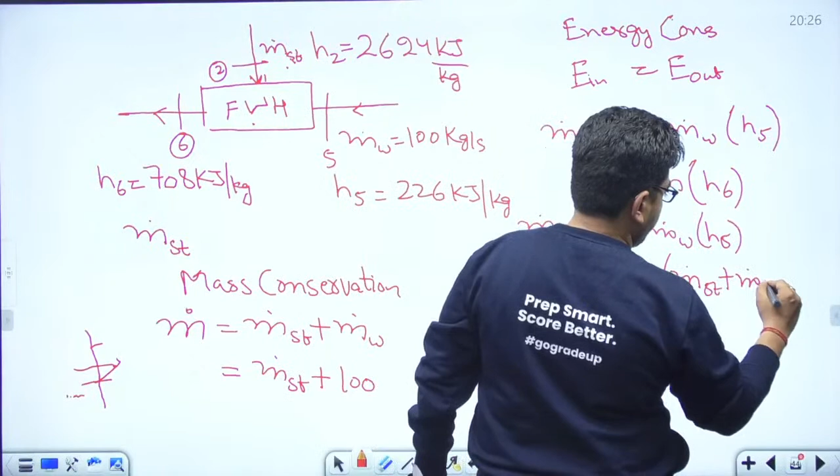So mass flow rate of steam into enthalpy of steam at point 2, plus mass flow rate of water into enthalpy of water at point 5, is equal to total mass at point number 6. So I can write it like this: mass flow rate of steam into enthalpy at point 2, plus mass flow rate of water into enthalpy at point 5, is equal to total mass, which is mass flow rate of steam plus mass flow rate of water, into enthalpy at point number 6. So I can write this equation.

This is mass flow rate of steam into H2, plus mass flow rate of water into H5, is equal to mass flow rate of water into H6, plus mass flow rate of steam into H6. This is the simple equation. Taking this to the left hand side, you have to find the mass flow rate of steam. Mass flow rate of steam into H2 minus H6 is equal to mass flow rate of water into H6 minus H5.

So you can calculate the mass flow rate of steam. It is the mass flow rate of water into H6 minus H5, divided by H2 minus H6. Let me just see the values. You know the value of H2, you know the value of H6, you know the value of H5. So mass flow rate of steam, which has been asked in the question, can anyone tell the answer?

Any one of you can tell me the answer? What is the answer for this question? Please guys, tell me what is the answer for this question. It is 0.2515.

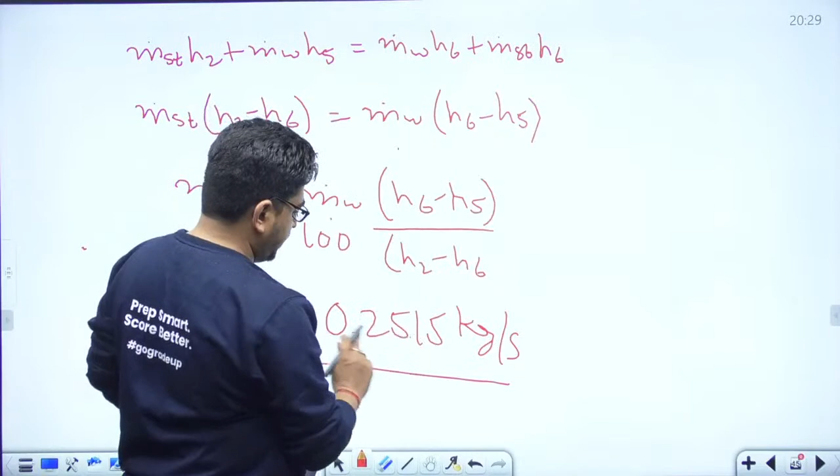Okay, is the data clear? You have understood the method now. I think you have to multiply with mass flow rate of water, that is 100, that is you will be getting 25. Mass flow rate of steam 25.15 is the answer. Yeah, 25, because you have to multiply it by mass flow rate of water.

Is this okay now, Mayank Singh? Agniva Banerjee, is it okay now?

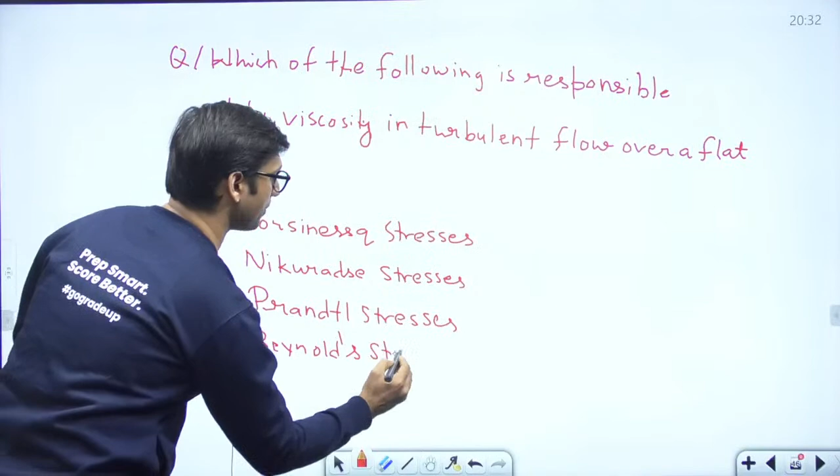That was a simple question, came for 1 mark in the GATE second shift. Yes, come on everyone, tell me the answer. What will be the answer for this question? Tell me everyone. The answer will be option A, Boussinesq stresses.

You know that the total stress in turbulent flow is equal to laminar stress plus turbulent stress. We can say total stress is sum of laminar plus turbulent. And the turbulent part we get from different hypotheses: Prandtl hypothesis, Reynolds hypothesis, Nikuradse's hypothesis, and Boussinesq hypothesis. According to Boussinesq, the turbulent shear stress is equal to eta times du by dy, and this eta is called eddy viscosity.

So this eddy viscosity was given by Boussinesq. It came under the hypothesis of Boussinesq. So the answer will be option A. Very good, very good, excellent.

Entropy generation, temperature, I can't remember. Okay, you have selected option A. Very good, Review King, quite a different name. So my dear student, yeah, definitely the answer will be option A for this question, that is Boussinesq stresses.

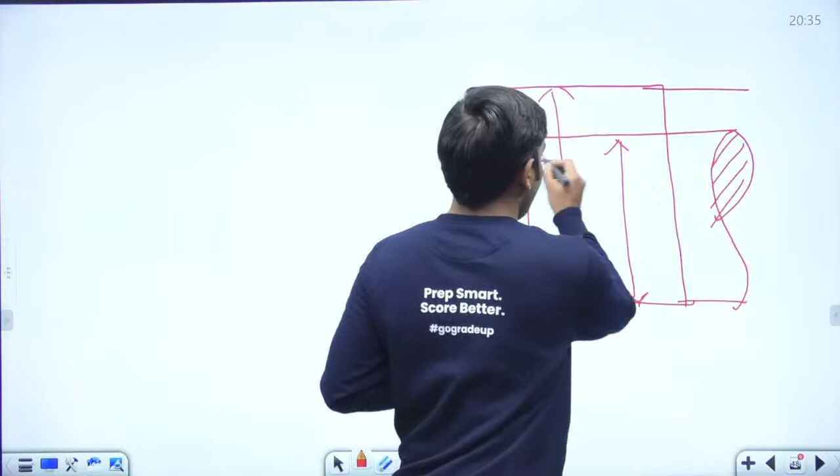If you see here, suppose this is my shaft, then tolerance on the shaft will be like this. And on a hole, tolerance will lie somewhere here. So the option will be something like this, that allowance will be the difference between the lower limit of the hole and maximum limit of the shaft. Options are framed in this manner. So allowance, I'm telling you, is basically your what?

This is a minimum tolerance. So what will be the minimum tolerance, guys? If I ask you here, what will be the minimum tolerance in this case? That will be the higher limit of the shaft, and between this, that is the lower limit of your hole. So that will be the correct answer. That will be your upper limit, or higher limit of shaft, and the lower limit of hole. So that will be your correct answer.

Very simple question. And the second question that I was having, that will be from your sine bar. Simple question, they are just asking you, sine bar is basically your angle measuring instrument that you know very well. That is a very simple device.

So suppose sine bar is supported on both sides on your gauge blocks. That is not from your single side. That is based upon the question that we have in your GATE set, that is the sine bar which is supported from both sides by your gauge blocks. It is something like this. Arrangement will be something like this. Is it fine, guys? And what data are we having here? Two rollers you are having here.

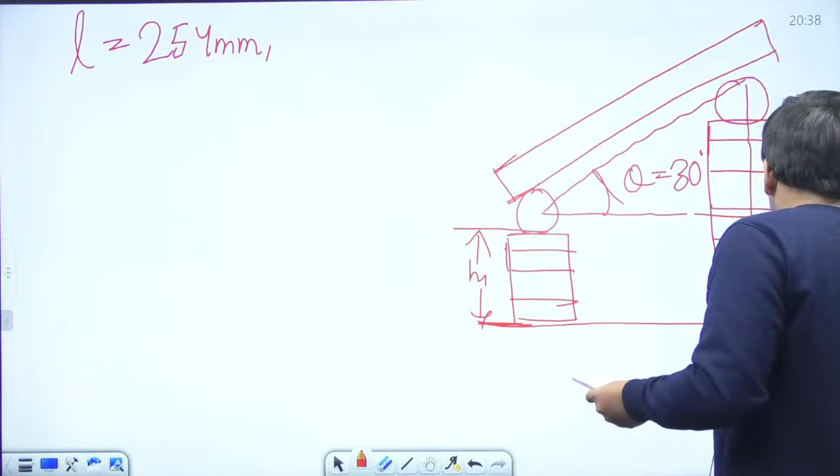Angle is given to us, and the height of the sine bar, that is your maximum height, is given to you. If I take from this side, that is h1, and on this side, if I take this as h2, one side height basically is given to you, and they have asked you what will be the height of the other side. Simply this thing they are basically asking you. So sine theta, you can write like this, that sine theta will be equal to h2 minus h1 by length of the sine bar. One height is basically given to you here, that is h2, which will be 76.2 mm.

And one thing very important here, they have also given you the radius of the roller, so that is not required in this case, because that will basically be cancelled out from both sides. So this radius of the roller will be the confusing thing here. A lot of students might get confused in this thing. All right, so you can simply plug and play and get your answer.

Sine 30 you know very well, sine 30 equal to h2 is given to you, that is 76.2 minus h1 by L. L is given to you, that is 254, and from your simple simplification you will get your value of h1. So h1 comes out to be something around your what?

Any idea, guys, what will be this value? Sir, solve it, data missed. Will you solve it, sir? Simply multiply this one and you have to subtract this one. What is the answer, guys? Please tell me what will be the answer, correct answer, everybody.

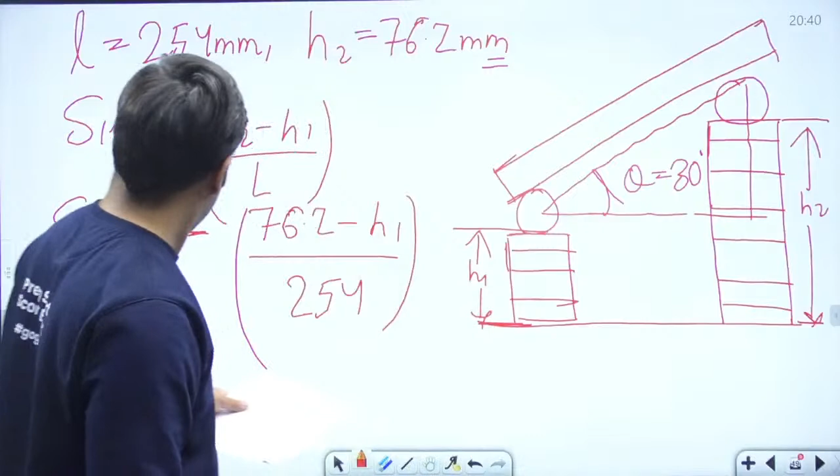Yes. H2 will be Sine 30 is 1 by 2. H1 is 50.8. 76.2 is basically given to you for your H2 case here. It comes out to be something around 50.8. So this is your correct answer here. Is it fine, guys? Yes.

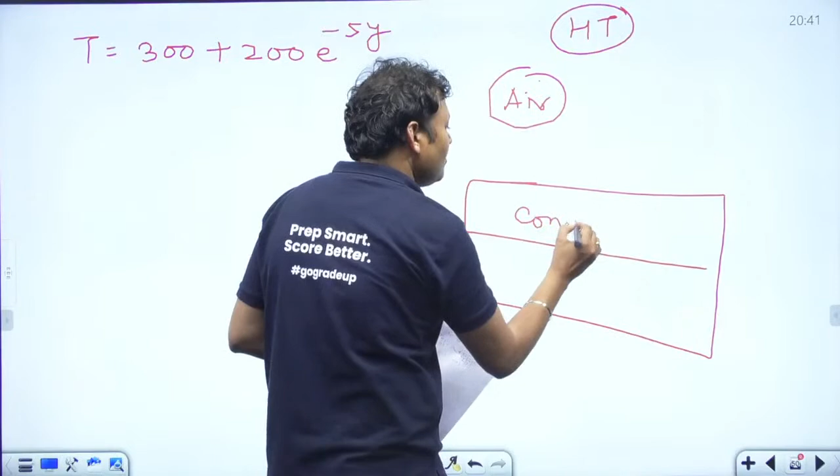So the question was to find out the value of dt by dy in the middle of the slab. The mode of heat transfer will be conduction in the slab, and the mode of heat transfer will be convection in the air, right?

But if you guys remember, in the no slip region, the mode of heat transfer will be conduction only. So there will be conduction in the slab, and there will be conduction again in the fluid also in the air, but in no slip region.

So if you equate the heat transfer rate, Q is equal to, we can use Fourier's law: minus K of slab into area available for conduction, into dt by dy in the slab, will be equal to minus K of air into area available for conduction (area will be same) into dt by dy at y is equal to 0, that is the no slip region in the air, right?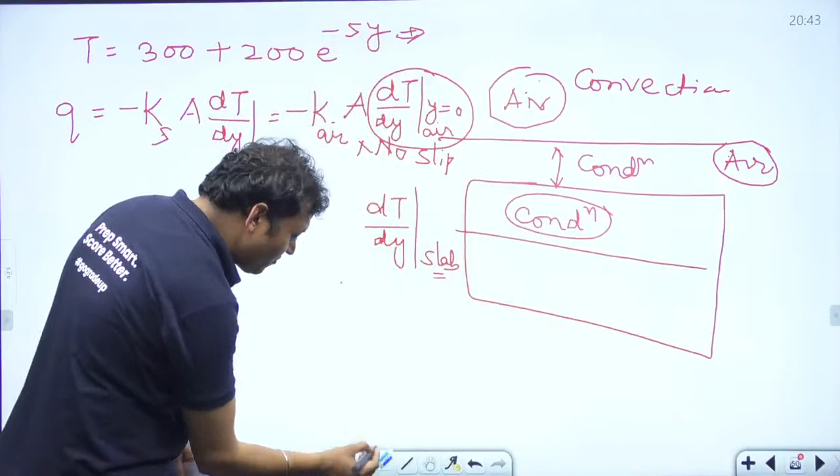So dt by dy in air we can easily find out from the given temperature profile. What is the value of dt by dy at y is equal to 0? Differentiate this expression with respect to y, it will be 200 into minus 5 into e to the power minus 5y.

And at y is equal to 0, the value will be minus of 200 into 5, that is minus 1000. Put the value here. Area and area are getting cancelled out.

So we can say dt by dy in the slab will remain constant everywhere in the slab. Why? Because the temperature profile will be linear. Can you guys draw the temperature profile? Why are we getting the negative sign? Because the heat transfer is taking place from the air to the slab.

We have already discussed these type of questions. So dt by dy in the slab will be equal to, minus and minus are also getting cancelled out. So everywhere in the slab dt by dy will remain constant because the temperature profile will be linear. So it is k of air upon k of slab into dt by dy at y is equal to 0 in the air, that is minus 1000. Isn't it?

What was the thermal conductivity of air given? And what was the thermal conductivity of slab given? We do not remember the data, or I am not sure whether it is correct, but if the thermal conductivity of air is given as, let's say, 10, and the thermal conductivity of slab is given as 100, then into minus 1000 will give you the value of dt by dy in the slab everywhere.

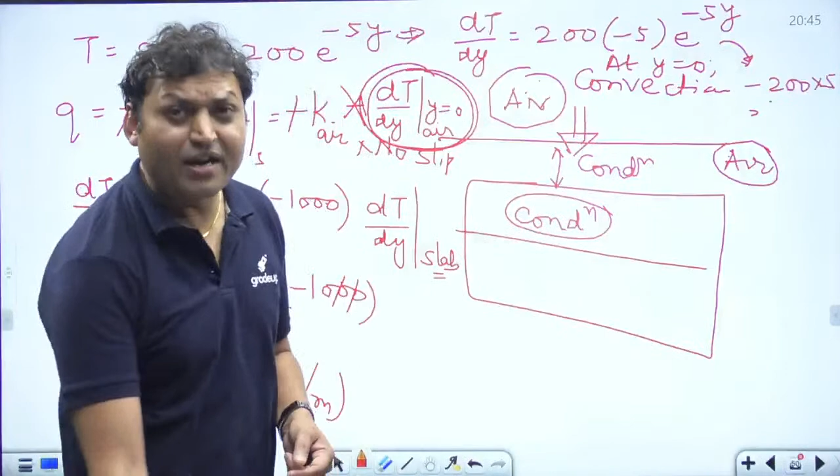If I am taking the value of thermal conductivity of air as 10 and the thermal conductivity of the slab as 100, then you will get the value as minus 100. Why negative? Because if you draw the temperature profile, this is the slab, let's say, and this is air. The temperature profile will be something like this.

Like this, so the heat is flowing. This will be the temperature profile, right? So it is a negative slope. Is it clear to everyone?

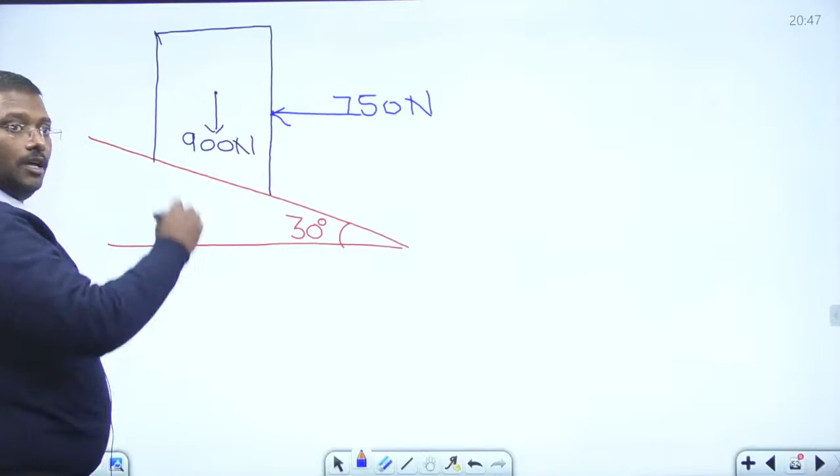Then what is the coefficient of friction between the block and the floor? How do we solve it, sir? Most of the time, what we do is resolve the forces parallel to the plane and normal to the plane. Remember, our intention is to get the solution as early as possible. That's why in class I mentioned, whenever the force is horizontal, try to combine the frictional resistance and normal force with the resultant force. If you do it this way, you can get it in a very simple way.

So once this is the case, what are the various forces we are going to get with this? With the vertical, the normal reaction is going to be perpendicular. This normal reaction is going to make the same inclination with the vertical as it makes with the horizontal. Now, in order to make the block move upward, whenever the block is moving upward, the friction is going to act downward.

So the frictional force is going to be like this. We are going to place that frictional force here. So the frictional force is downward. According to the transmissibility of forces, once you bring the frictional force to here, the resultant of these two forces is going to be like this.

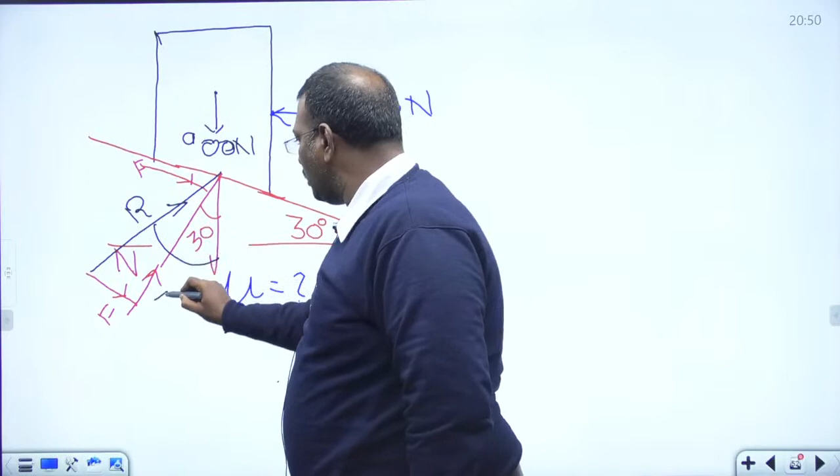This is your resultant force R, which will make an angle of 30 plus phi degrees with the vertical. Now with a simple Lami's theorem, you are going to get the solution quickly, instead of resolving the forces parallel to the surface as sigma Fx and sigma Fy. That is, your answer is correct, my dear friend. Whether you followed this method or not, you try to tell me.

Who else gave an answer? Banranji, just consider how we have to draw the free body diagram of it. It is going to be 900 newtons downward and 750 newtons like this. And the reaction is going to be in the first quadrant with vertical 30 degrees plus phi. Therefore, this is going to be the resultant, which makes an angle of 30 degrees plus phi.

Now, so these two values we know. Did any of you solve it this way, or by resolving the forces? Just think about how much time you took, and how much time this method takes. Now, according to Lami's theorem, it's going to be 750 divided by, how much is this angle, sir? It is 180 minus 30 plus phi. Therefore, we are going to write it as sine of 180 minus 30 plus phi.

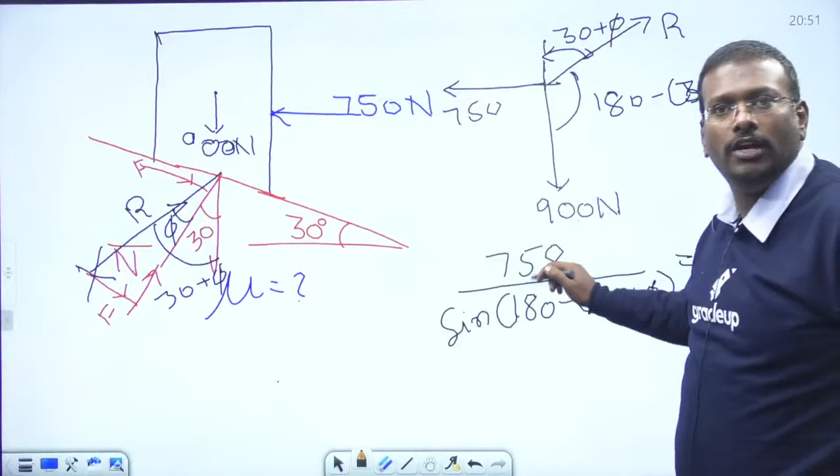I know the angle, so I know the force value here, it is 900. Therefore, 900 divided by sine of how much is this angle, sir? It is 90 plus 30 plus phi, where 30 plus phi is considered as a single term. Now from this, we can write it as 750 divided by...

So I will write here 750 divided by sine of 180 minus theta is going to be sine theta, that is sine of 30 plus phi, is equal to 900 divided by sine 90 plus, which is going to be cos of 30 plus phi.

Now here if you observe, my dear friends, if I bring sine to the right side, it is going to become sine 30 plus phi divided by cos 30 plus phi. We are going to get the value as 750 divided by 900. Therefore tan of 30 plus phi we are going to get as 0.83.

Now, if you solve this one, we are going to get 30 plus phi is equal to 39.8. So therefore phi we are going to get as 9.8 degrees, my dear friends. So once you know the angle, we are able to get the coefficient of friction.

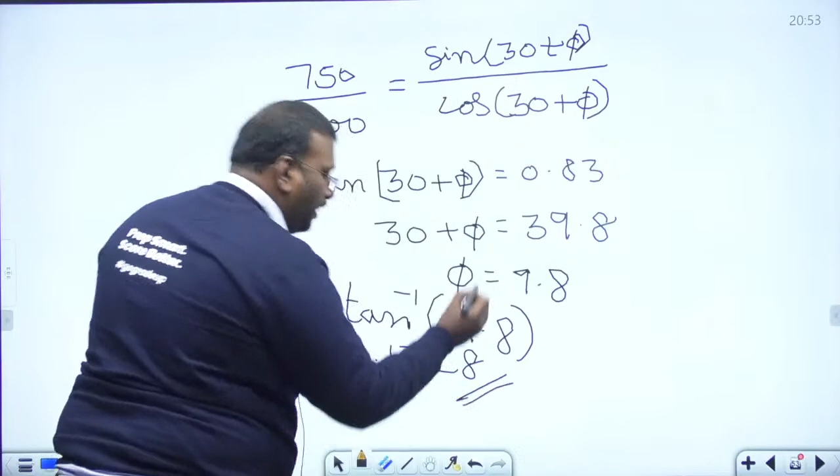So we have to know which method we are going to use, whether we are going to apply Lamy's theorem to solve this problem or resolve the forces. All of you remember, my dear friends, once the force is horizontal, better go ahead with Lamy's theorem. Once it is given other than horizontal, you go ahead with resolving the forces.

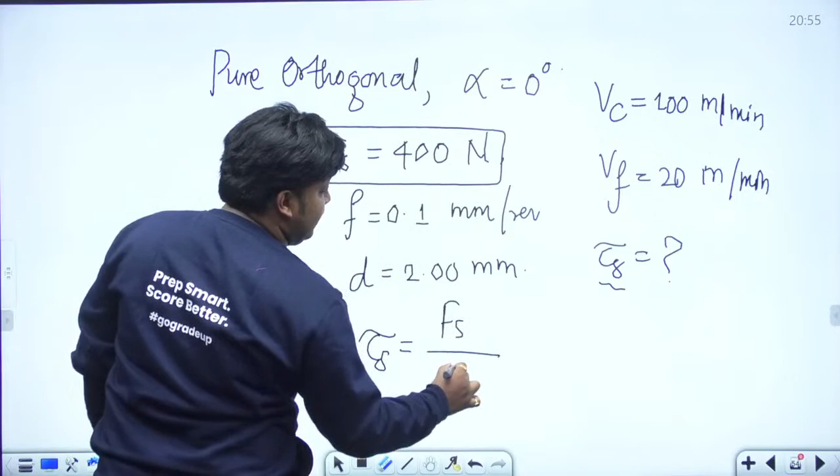So what is the shear strength of the material? It is nothing but the shear force Fs divided by sheared area As. It will be in megapascal. So what is the shear force available? 400 Newton. The sheared area, what is the formula, dear students? We know the shear area is nothing but B into T1 divided by sine of angle phi. You know it very well.

So see, in pure orthogonal turning, you know that the width of cut is nothing but the depth of cut. So B is given as 2 millimeter. So again, in the pure orthogonal cutting operation, uncut chip thickness and the feed are same, that is 0.1 divided by sine of angle phi.

So definitely, the unknown thing here is phi. To calculate, we can very nicely calculate the value for the shear angle phi with the formula. What is that? You know that tan of phi is equal to r cos alpha divided by 1 minus r sine alpha. So here alpha is 0, definitely this term is going to vanish. We can directly write tan phi is equal to r. Yes or no? So what is this r? Our cutting ratio, our chip thickness ratio.

So definitely we know the formula for the calculation of r. It can be calculated as uncut chip thickness divided by cut chip thickness.

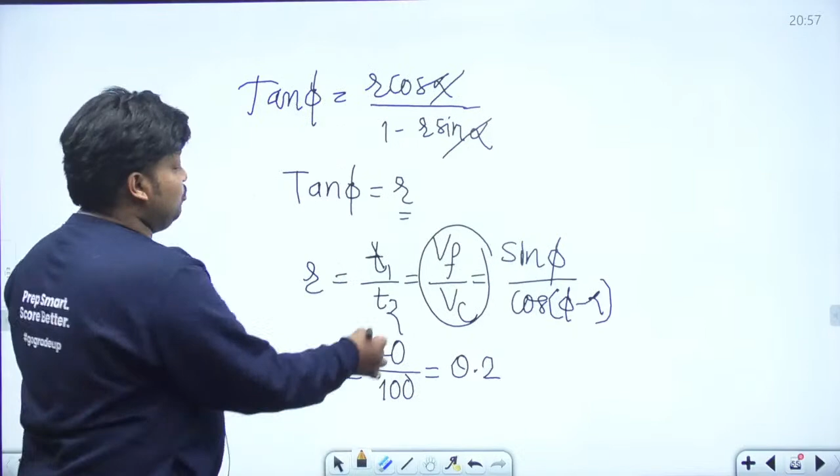It is also equal to VF divided by VC, or equal to sine phi divided by cos of phi minus alpha. We are having these two terms available for the calculation of r. So what is r? That is VF, the flow velocity or chip flow velocity, 20, divided by cutting speed 100 meter per minute. It will be 0.2. So put the value here, r is equal to 0.2.

So it will give you the value of shear angle phi, how much is it? 11.3031 degrees, right? It is over. Yes, come on, tell me.

So if you have this value of phi, you can definitely calculate the shear area, that is B T1 divided by sine phi. B is how much? 2 into 0.1 divided by sine of 11.31, it will be 1.019 millimeter square. So this will be the shear area, and very nicely you can now calculate the shear strength.

Shear strength is equal to shear force divided by shear area. It is 400 divided by 1.019, it will be 392.23 megapascal, that is Newton per mm square. So this is the answer, dear.

What they are asking is to calculate the shear strength of the material. Yes, it's a very easy question. 392.23. How many of you got this correct?

In orthogonal cutting operation, dear student, lambda is equal to 90 degree and CS is equal to 0. Side cutting edge angle becomes 0, and the approach angle, principal cutting edge angle, is 90 degree.

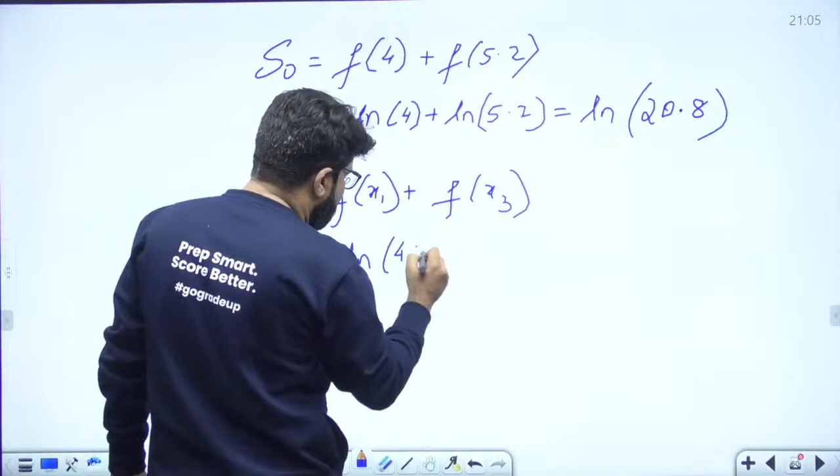What is S1? S1 means the sum of all the odd point samples, f of x1 plus f of x3. What is f of x1? Log 4.3 and log 4.9. This equals log of 4.3 plus log of 4.9, which equals ln of 4.3 multiplied by 4.9, using log AB. We'll do these calculations together later.

Then S2 is the sum of the function at all the even points, and the only even point is x2, and the value of the function is log 4.6. Let us calculate these values and place them down quickly.

What are the values coming? The first one is log 20.8, and the answer is 3.03 approximately. The next one: first I multiply 4.3 with 4.9, then take the log of the answer, which is 3.05 approximately. And the log of 4.6 is approximately 1.53.

What is Simpson's rule? The value of the integral using Simpson's rule is h by 3 times S0 plus 4 times S1 plus twice of S2. Put down the values and let's see what the final answer is.

What are the values in front of me? I'll place them: h is 0.3, so 0.3 divided by 3. What is the value of S0? 3.03, plus 4 times S1 which is 3.05, plus 2 times S2, which we just calculated as 1.53. Let's complete the calculations quickly.

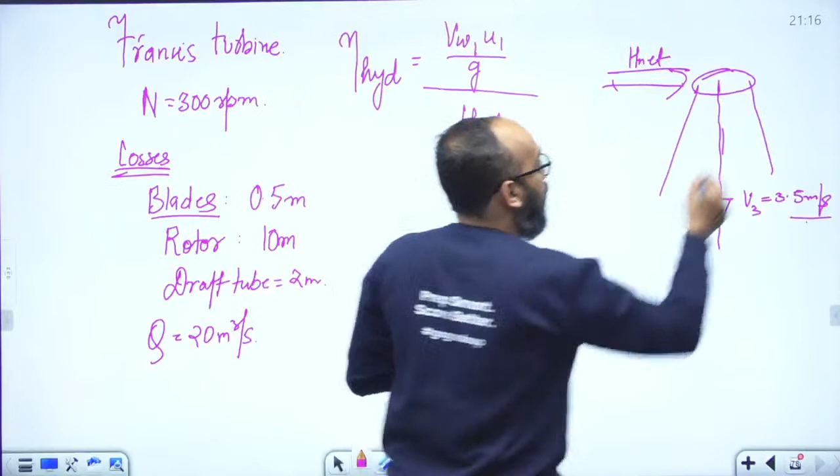And they have asked us to calculate the hydraulic efficiency. Hydraulic efficiency is now very important. The data also said that V omega 2, which was radial at the exit. If it is radial at the exit, this is V omega 1 U1 upon G divided by net head which was supplied. Now all you need to do is apply a very simple concept: this is the head that is supplied, V omega 1 U1 is nothing but basically the power that we are generating from the runner in terms of head, and then there are losses plus this kinetic energy that is going out. So if I write this equation by just applying principle of conservation of energy, this is V omega 1 U1 by G plus the kinetic energy that is coming out in terms of head.

So this is 3.5 squared upon 2g plus the losses that are happening. What are the losses that are happening? You add it up, 12.5. So from here we get V omega 1 U1 by G. This value is given as 200 meters. So if we calculate, guys, we get the value as 186.87. Even the board has got tired. This is this one, so put the value here. We are getting the efficiency as 93.43%. What say, guys? Are you getting the same value?

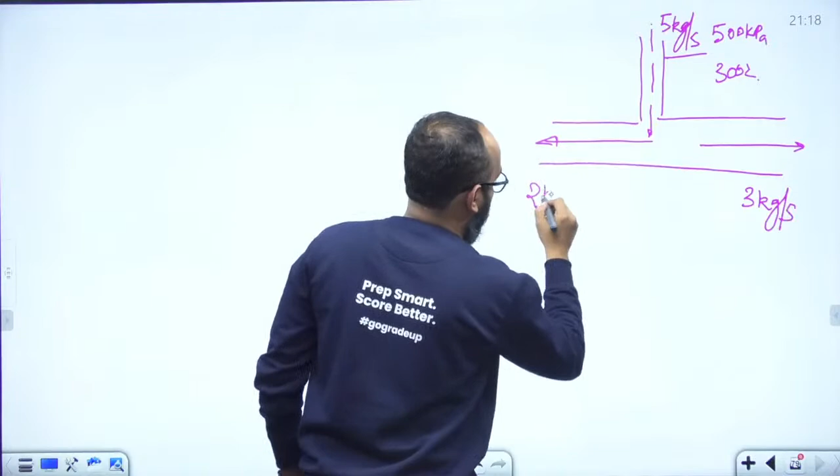So the condition is given that 5 kgs per second at this rate, pressure 500 kilopascal and temperature 300 Kelvin is supplied in this control volume, and this gets split into two components. One is 3 kgs per second, the other is 2 kg per second. Now the pressure and temperature for 3 kgs are given as 100 kilopascal and temperature 340 Kelvin. And for 2 kgs per second, the temperature is given as 240 Kelvin, and pressure is given as 100 kilopascal.

Now you might be thinking everything is given, so what do we do? Now there are two things - if you apply it conceptually, or you might not have applied it conceptually, whatever happens, the answer should be correct. Now see, this is a case of an open system.

For an open system, the change in entropy is written as the entropy transfer plus the entropy generation plus the entropy transfer due to mass transfer.

Now with this question, two very important words were mentioned: steady and insulated. Since it is insulated, there is no entropy transfer, so that becomes 0. Since it is steady, entropy being a property of the system is also 0.

All you need to do is apply the basic concept that this is the entropy change when the fluid enters, getting divided into 2 kg/s and 3 kg/s streams. So the entropy change of the system is the entropy change of the 3 kg fluid, Cp ln of final temperature.